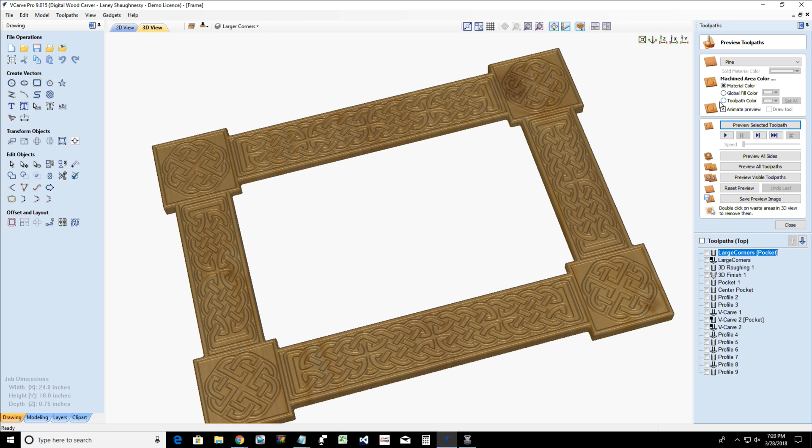If I put the color back on here, you can see if we had some color in the design. Let me get my corner color set back to black. There we go. So we'd see this nice looking frame with that Celtic design, kind of that raised effect and stuff.

Now, before we get into the joinery, let's go over to our 2D view here and let's talk about the vectors. I'm going to provide these 3 Celtic vectors to you guys and girls. What basically it does, these 3 individual vectors will allow you to build a Celtic design of any size.

We've got a middle strand, this part over here on the left. You guys let me know if I need to change my mouse so you can see it better, because I can go in and change it again if needed. But here, this little blinking area - this is kind of the middle strand that can be added to create any length that you want.

And then we have a corner piece, and then we have an end cap - if it's just kind of a straight strand, we have that end knot. I'm going to show you how I found them, basically Google searching and tracing the images. And then I want to show you how we blend these images together to create any length that we want.

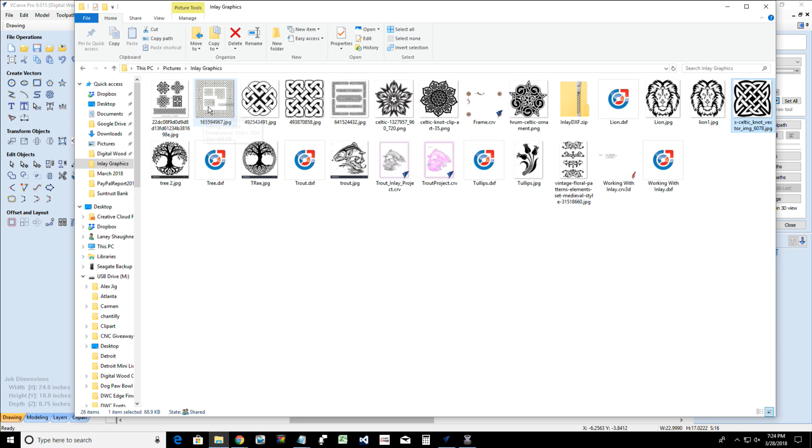There was some different unique kind of tribal look I was looking at, just different Celtic knots - I don't know where the lion comes into play there, but I looked at different Celtic designs and things. And ultimately, I ended up working with a design that allowed me to create 3 different parts.

And these parts are expandable. What I mean by expandable is let's take this group here, and I'm going to group it together by clicking on group after it's selected, and I'm going to grab this end cap here, and I'm going to group that together.

And if I come over and drag this over and line up my two parts, I could end up making a copy of this one. If I hold my control and alternate key down, I can pull another copy off of here and drag these knots out, and just start chain linking them together. I could make any length I want, and then use the end cap on both ends, whatever the case may be. As you can see here on the left, that's exactly what I did.

Now, when we bring these tracing vectors together, since they're closed off, we want to make sure there's a bit of an overlap on the two parts. Once we have that overlap, we're going to ungroup both parts, select only the outside boundaries of the two parts, and weld them together. That will remove the overlaps.

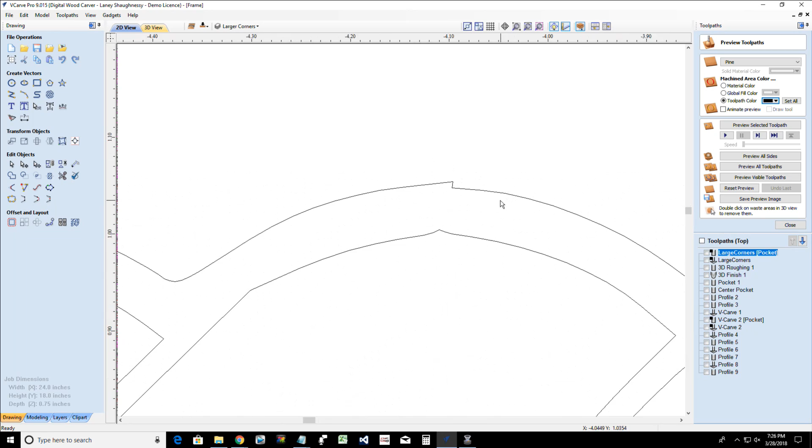Now there's two pieces here, three pieces. This piece gets deleted, this piece gets deleted, and this piece gets deleted. Now where the joining happened, we have a couple of step downs that we have to adjust.

That's a very simple node edit. We're going to come in and delete this point to pull that into shape. I can delete this point as well, and turn this into an arc just to get a little bit of curvature out of it, to kind of straighten out that curve. Let me zoom in tight for that.

Same thing down here, we can delete this point and pull that curve back into shape. We'd do that all the way down to get our curves cleaned up. On these two nodes, we delete them by hitting the delete key or right clicking and hitting delete, turn this to an arc, and pull that arc up ever so slightly to finish off that curve.

So we'd come down to the other side, same thing. Excuse me one second, I want to make sure that you guys aren't trying to... okay.

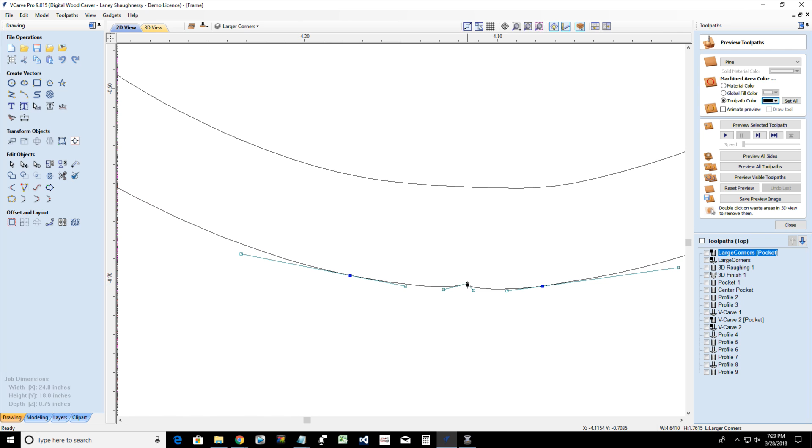For the last one, we've got two points there, so let me get on it. We would delete this point, and we would actually delete this point as well. Zoom in if it doesn't let you get on those nodes because of the anchor, so you can get rid of that point, and just kind of smooth out that line.

Sorry, we have some people walking in front of the property, so the dogs are barking. Once we do that, now we can group that together, and we could continue daisy chaining this together in a sense, and finish off with the end cap.

Now, before you do this, make sure you make copies instead of using your originals. Keep your originals intact, because right now if I wanted to put the end cap on the end of this, well, I don't have my original anymore. I just blended it together with this one, so I don't have an end cap. Now I'm forced to Control Z to undo everything I just did and get back to this point before the welding.

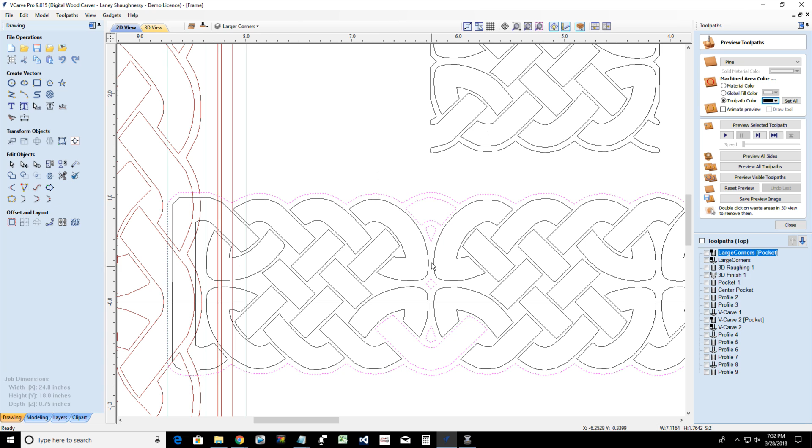And once again, I could ungroup that and select these two inner parts here holding my shift key, and I could weld, and then go through and delete those three inner parts.

You get the routine, you know what I'm talking about. So you're gonna get these vectors, so it'll allow you to create. You got some, you can make some frames with it.

Basically, you've got a corner piece, you've got just a straight run, and then you have an end cap. So those three vectors.

Yes, you could, Dwayne. You could put the originals on their own layer and make copies off of that layer. Absolutely, that would be the ideal way to do that.

And so let me take this and group it together. But so you get the idea.

All I did with these is once I had them grouped together, I went ahead and scaled them to whatever size I wanted on the width, and then I just stretched them to the length I wanted. If I needed to do any stretching or adjusting, I tried not to stretch too much. I don't want to stretch the knots out and deform it, but I had to do some stretching to get it to fit into my frame areas.

Okay, so we're gonna undo. I'm just undoing everything here to get back to my three original parts. Almost there.

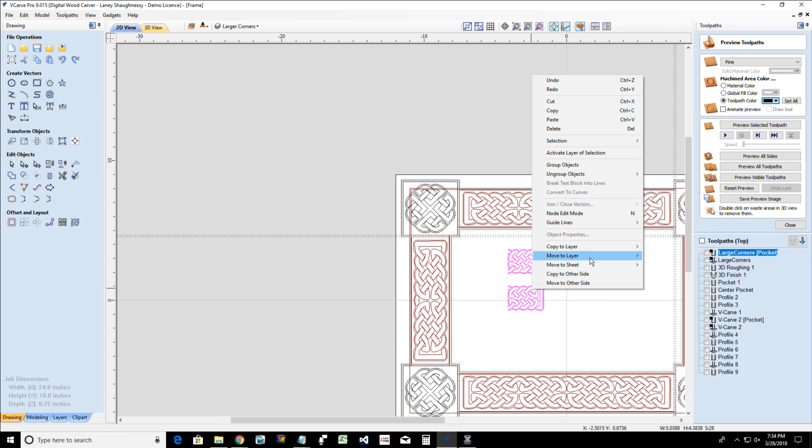There we go. And these three parts are going to be a DXF file that I'm going to provide. I'm actually going to provide this whole frame design for you in the Facebook group, the whole Vectric V-Carve frame design. But I'm also going to provide the DXFs because I created this design in V-Carve Pro, and for you guys and girls that have Desktop, I want you to be able to open it. You should be able to open it. It's a CRV file, but I'm not sure exactly the routine there.

So I'm going to just call this my Celtic DXF master layer. And I'm going to make it invisible because I don't need it visible right now.

All right, now let's talk about this Celtic design. Let me turn off the guidelines to get them off the screen, and let's take away some of the layers that I've created. So my large corner layers, let's take them away for a minute. Let's take away the center profile. The 3D - okay, that's my whole design.

Now if you recall, this was the original shape of the original frame, and we had models. Let me come in and see if I can turn on that layer 1, those models. And when we looked at the 3D view - let me close this - we had those models, and that's what we used in Monday's class to create that design. Well, I liked it, it was okay, but I really wasn't married to it. You know what I mean? It was a little, really nice looking, but it was skimpy, right? There wasn't a whole lot to it.

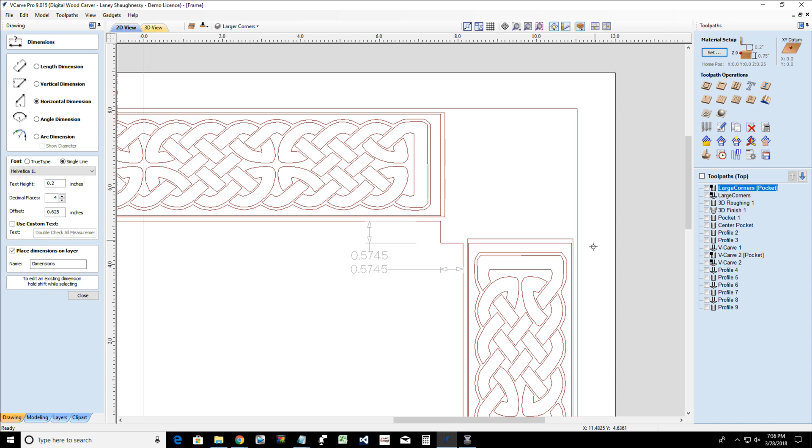And so what I did was I drew another rectangle, and I offset it outward on these two edges that same distance. And what that did for me - I'm going to take real quick and close my tool here. And you can see my measurements that I have over here on the left, where I was measuring to get those numbers.

But let me take this vector here, and let me move these to a layer. I'm going to call this layer my original.

And you see all these layers that I've got. You're going to get a version of this file with everything cleaned up, named, and organized. Even the tool paths are going to be named and organized for you. I'm going to do all the work. But I'm going to just call this my original frame layout.

I'm going to make that invisible for a moment to hide those two vectors, and let's delete that one.

Now, what I ended up doing was redrawing those rectangles. On the large corners, I made those offsets coming out from this edge, 0.5745, and coming from this edge out 0.5745, and made the four corner blocks much bigger. One of the Celtic knot designs, which you're going to get this vector as well, is what I ended up using in these larger corners, scaling them up and everything.

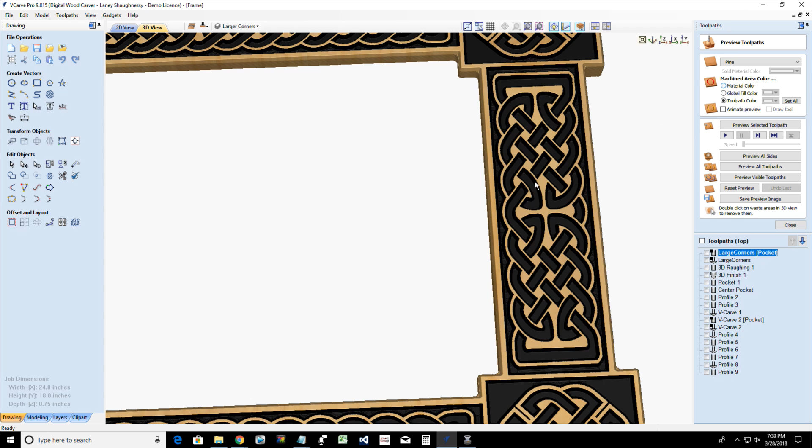On the inside and outside edges, I had that 60-degree bevel cut. Because I had that inside cut and everything, I wanted the outside of the frame and on the inside, where the opening gets cut out, to be beveled as well.

What I ended up doing is that offset distance — my depth of cut, by the way, was 1/8 of an inch. So knowing that, I drew a V-bit with a simple line tool. I drew a 60-degree V-bit.

I drew a line from the tip of the bit straight out, no particular length, and I moved that line relative to its position on the y-axis. I moved it up 1/8 of an inch. By doing that, it's simulating that cut depth.

So now I was able to take that measurement, that horizontal measurement for this offset, from this point to this intersection. I was able to get that offset, that 0.0722, and it allowed me to create the vectors.

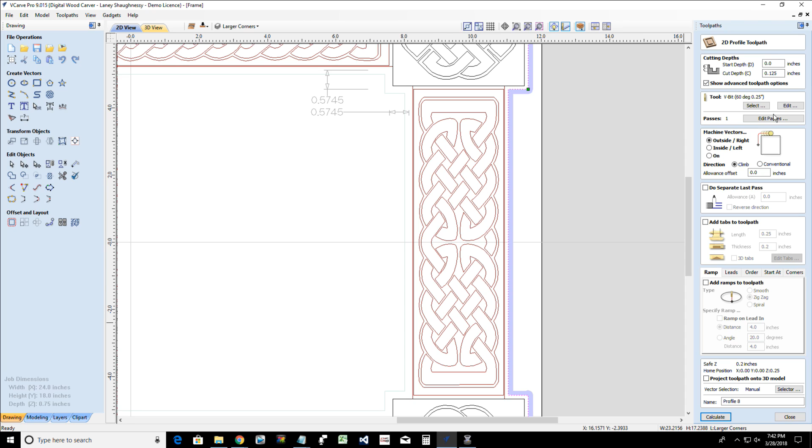Then I was able to run a profile toolpath with my V-bit. Oops, not that one. Nope, not that one, I've got to rename these. I was able to run that profile toolpath with the V-bit, and if we look at that profile toolpath, it was just a simple 1/8 inch cut on the outside of the line with my 60-degree V-bit, and that created that chamfer for me.

And then I did the same thing on the inside, running a profile cut with an inside toolpath with my V-bit to create that inside chamfer.

Now, when I actually cut the part out, I needed to know what that offset distance was, that 0.0722, because when I created the final profile toolpath, you'll see that the final profile cut is offset away from the line by that 0.0722.

If I open up that profile toolpath, you'll see that allowance offset away from the line. What that did, when it cut that profile all the way out — let's turn on the preview — is the edge of the end mill literally cut down the center of that V cut.

By offsetting that profile cut outward, it cut down the center of the V cut, creating that nice chamfer on the edge. Now you're going to see tool marks here on the inside and outside — those are corners I'm going to have to clean up. The software doesn't do a really good job of rendering inside and outside corners, so you're going to see those little anomalies right there.

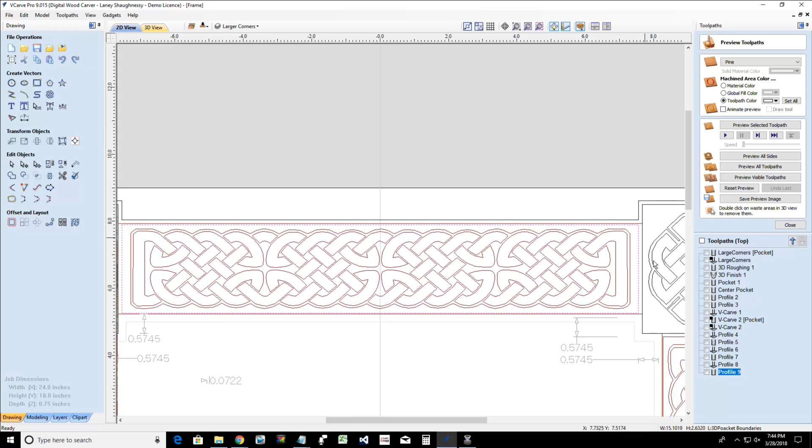So in order to get that nice width on that upper lip of the cut, before the chamfer and all, I had to go in and create an inner boundary with that offset distance, 0.0722, when I created my V-carve toolpath. This V-carved toolpath has got a 0 start depth, a flat depth of 1/8 of an inch, a 60-degree V-bit and an 1/8 inch end mill. Now notice that's the wrong one.

Let's actually open up the correct one, the large corners. Let's open up the correct toolpath. Let me uncheck this one here. And if we open this up, once again, it's the same 1/8 inch end cut and everything used to create those V-carve cuts.

Now, the pocket cut did all the inside, so now you can see the actual toolpath area that got cut.

Now, when I originally created this with the Celtic design, this outside rim right here on the knots was very thin. So I ended up offsetting a new line outward, this pink line right here—let me hit the control key to show you where my mouse is—I offset outward about a 1/16 of an inch just to get a nice bit. I wanted the wider profile to be about the same as the white area here on this Celtic knot.

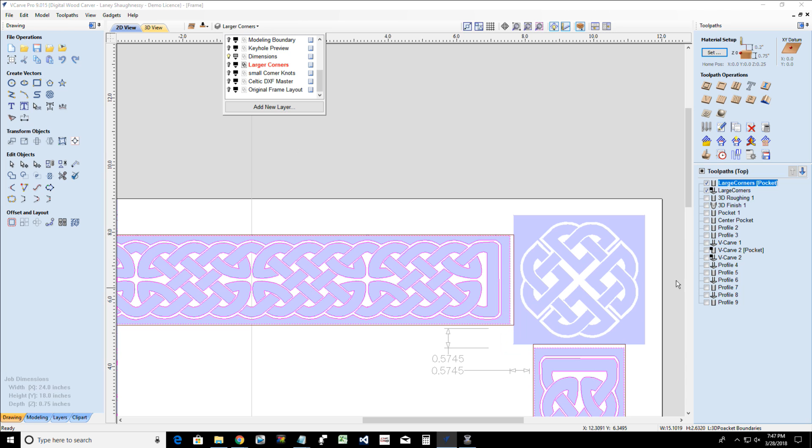So if we were to recreate this from scratch, we would basically have drawn out our frame. Let's see if I've got my layers organized correctly—let's turn off the toolpath here. We have our 4 rectangles that we've created, and the Celtic knot is centered within those 4 rectangles.

We've drawn out the 4 corner blocks, which are the large corner blocks here. And inside these 4 parts, you can see that I'm offset off of my line. I created another rectangle here, offset off, and that's what my pocket cut and my V-carve use—those are the 2 vectors we're using to create that toolpath.

That gave me that nice wide frame all the way around on all 4 sides, and it gave a consistent look. If we look at the preview one last time and zoom in, let's turn those toolpaths off so we can see what's going on here.

Let's get up close and personal with this. You can see that constant thickness all the way, even past the edges, around the corner and everything. So we just created those offsets so that when we machined these straight areas with that raised Celtic knot, the V cut width would be consistent with the corners, that chamfer on the corner, so it's a continuous line.

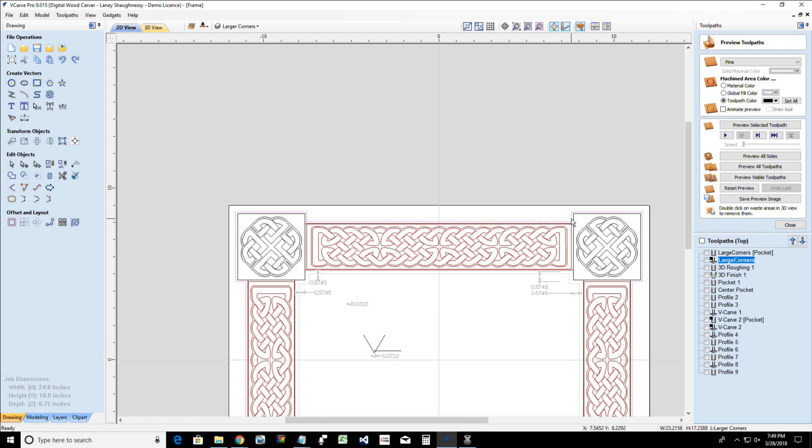And so it was just a matter of taking measurements, offset measurements and everything, and determining what I needed to do to recreate those knots. Once I did that, I created a new profile path for my V-cut, for that chamfer, and also for the final profile cutout.

All right. Now, taking this design as is, here's where we're going to start from kind of scratch, and we're going to see how we would create the joinery if I was going to cut just this part out of a long board, then cut out the two side parts, and cut out this other part—cut these all out four separately. I want to be able to join them, kind of like a half lap on the back side of the corner block.

This allows me to have a long, narrow board on my table, and cut out, you know, more than one long narrow board, or even short boards—it doesn't have to be long. I can cut out these frame parts, 1, 2, 3, and 4, instead of cutting it out of a full panel with all this waste in the middle. How would I cut this out? How would I draw the joinery? And that, ladies and gentlemen, is what we're going to be doing now.

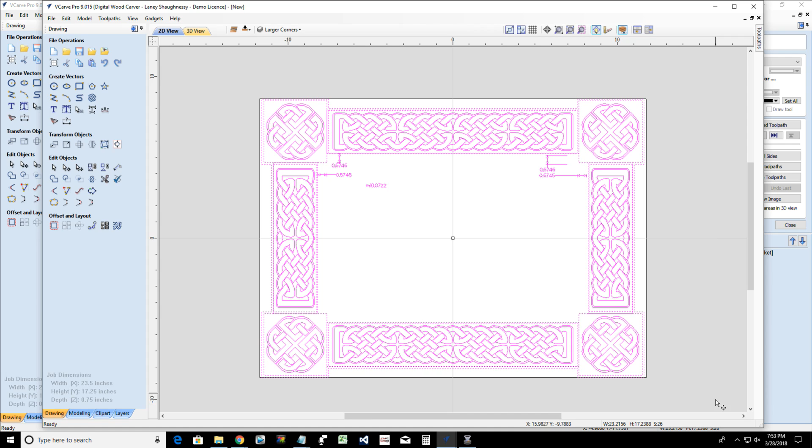But your question was, can you import data from one file to another without having 2 sessions of VCarve running? The way to do that is you export out of your original design and save that as a DXF file. I have a folder with all kinds of DXF files for things like picture frame profiles, router bit profiles, different designs, and I can pull those DXFs into any new project. So David, that's kind of how you would handle that.

Wayne Henniker asks, how did you get the measurements to show on the project? Well Wayne, we have a tool in Vectric called the dimension tool. It's under Create Vectors, where you add dimensions to a 2D drawing. In that dimension tool, we can take a length measurement, a vertical measurement, horizontal, an angle.

We can even get an arc measurement, and we can write in custom text if we wanted to, but we would select what type of measurement we're trying to take. In this case, it'd be a horizontal, and then I could come from this point to this point and pull in that measurement. I can change the size of my text height or how many decimal places I'm showing, and I could show the offset distance of how far it offsets from its endpoints and things.

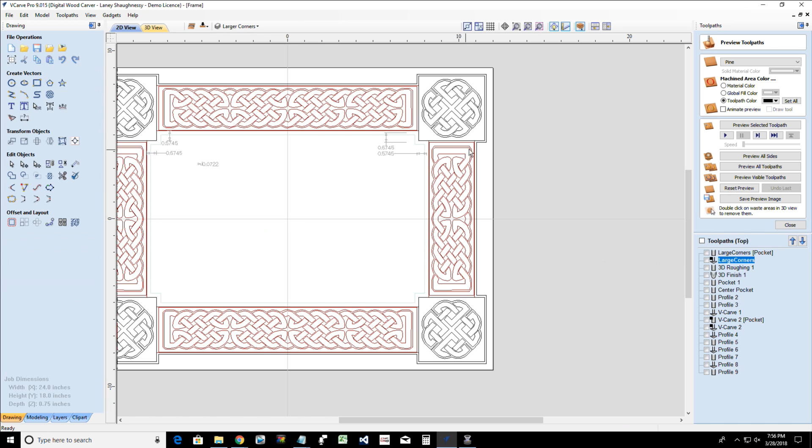So the V-bit is basically on my outer profile. I'm doing a profile toolpath, cutting down 1/8 of an inch deep. I wanted that bevel to be the same as what my pockets were with this Celtic knot, which was 1/8 of an inch. So I cut 1/8 of an inch deep on the outside of the line with my 60-degree V-bit.

What that did for me was to create that chamfer on the outside of the cut. Now that 1/8 inch bevel goes from the top of that cut down to the middle of that V, because this would be a V cut. I'm going to reset this back to a blank board so I can demonstrate this.

So that V cut, that chamfer cut, if we were to preview it, you're going to have that V-shaped cut. Let's turn this around so we can see both sides of that V. Now, that distance from one side of the V to the center, that offset distance, 0.0722, is my offset distance for my V.

That 0.0722 — when we created the final profile toolpath with our 1/4 inch end mill, we offset that, cutting all the way through our material with our 1/4 inch end mill on the outside of the line, but we offset that cut 0.0722, that offset distance, to the middle of that V. By doing that, that allowed us to do that profile cut and cut that edge right off at the center of that V to create that chamfer.

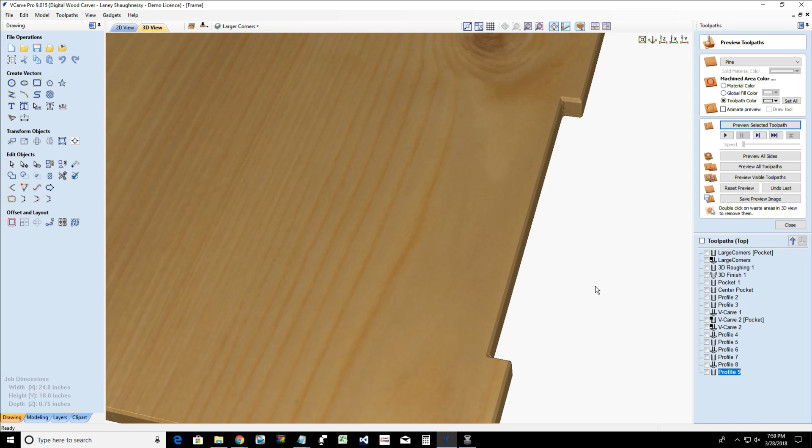Yes, David, you're welcome, first of all. You could save your 3 parts and import them into other files. Those 3 parts — let me go down to my frame pieces right here — these 3 parts, you can save as a DXF file, and that's what you guys are going to get. You're actually going to get a DXF file with these 3 parts in them.

And you can bring them into any job that you want to — oh, I want to make a Celtic frame, or I want to make a Celtic knot running along a long length, or whatever the case may be.

But you can also put a corner on it rather than using separate corners. I used a different Celtic design, but you're going to get this corner Celtic design as a DXF file. You're going to get the 3 parts as a DXF file, and that way you can use them in other projects. Okay.

And yes, we would save them as a DXF, and that's exactly the type of file you're going to get from me — a DXF file that you can bring into other parts.

All right, so let's turn off some layers here. Let's turn off our DXF layer, and let's turn off our dimensions. Let's get into full view, and let's get over into our drawing side, because we're going to be focusing on the drawing.

And here's where it kind of gets challenging. We're going to create some joinery on the back side of this to create some half lap joints. Basically, these parts, the 2 rails here, are going to snap into the back of these 2.

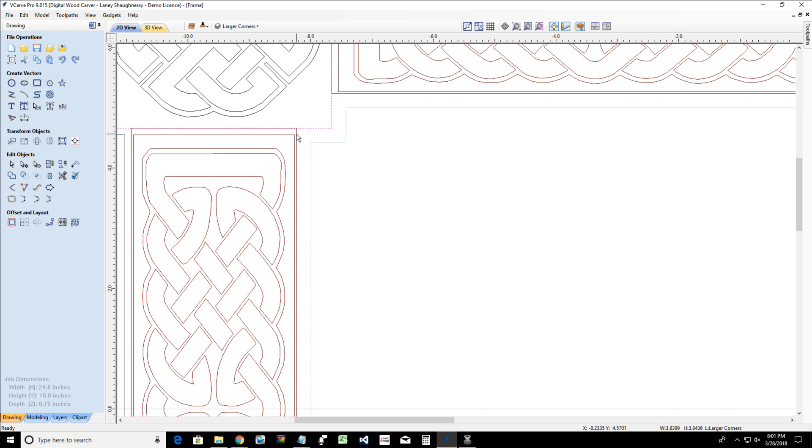So in order to do this, we're going to take some of our original vectors — our corner here, our outside boundary. Oops, not that one. Our outside boundary on all 4 sides, our corners and our outside boundaries.

And we are going to right click, and we're going to copy them to the other side, because we're going to be doing this on the back side. Remember, this is a 2-sided project. We're going to do all of our joinery on the back side, so we're going to copy them to the other side.

And now if I flip and toggle to the bottom side of my board, you'll see that those — oops, I forgot one of the rectangles. Let me switch back over and let me get that bad boy over there as well.

Copy to other side. There we go. Oh, I gotta remember I'm flipping my board, so bear with me, I copied the wrong vector. I'm a goofball. Copy to other side. There we go. That should do it. Remember, when you're flipping along the x-axis, everything that was on the left is on the right, so on and so forth. So I was copying the wrong vector.

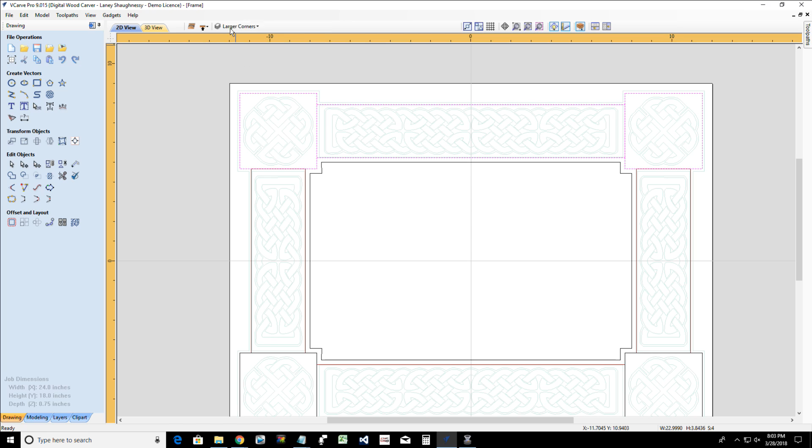Now, on the back side, let's decide right now that this top part here, let me see if I can turn off the other vector layers in the background. That way it... let's see if I can get my... oops. Let me flip this over. Let me put those 4 Celtic knots, corner knots, on a different layer so I can turn them off. So let's take those.

This is where layers really come in so handy. I don't care how many layers you have, but you can just separate things to make it less complicated. So these are going to be my corner knots, I'll call it. Right now I don't want it visible, so I'll just turn off the visibility. Alright, now I'm going to flip back to the other side.

Let's see here. Stand by, I gotta remember what layer I was on. What layer was I on? Hold on a second, guys.

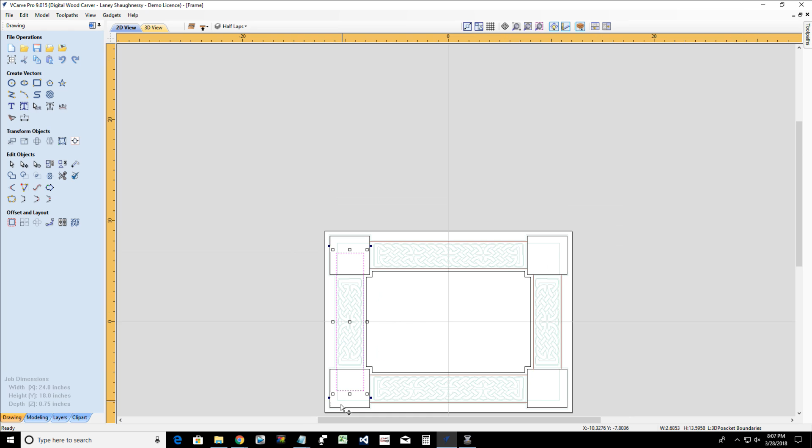You better snap there, boy. I don't think it'll snap. But that's alright. If I grab this, I should be able to snap that to the center. And I should be able to come in and snap that. So I actually did snap to the center, I just didn't realize it. Alright, so that's going to be our one piece.

Now this is going to be important because on the back side of the rails, the top piece and the bottom piece, is where this pocket is going to be machined out so that the stile fits into it. I have to do the half lap on the front part of the stile. So right now we're working just on these back corner blocks because we're doing our pocket on the back corner. And the front side of these 2 rails is going to be pocketed out. You'll see what I mean in just a moment.

So let's go ahead, since I've already got this one drawn, I'm going to cheat. I'm going to delete this one, and I'm just going to mirror this, creating a mirror copy, flipping about job center, and flipping it horizontally. Just going to mirror it horizontally. Okay, that way I have my 2 parts. Now we're on the back side of the board, so we're focusing on the 4 corner pieces.

Now there's 2 ways that I can approach this on the 4 corner pieces. One, I can just draw a rectangle here and create a pocket cut. I would do some little dog bone fillets, you know, because square peg, round hole kind of thing. I could look at if I took these corner parts, I could kind of... No, I think I'm going to do the rectangle. That's going to be the smartest way to approach this.

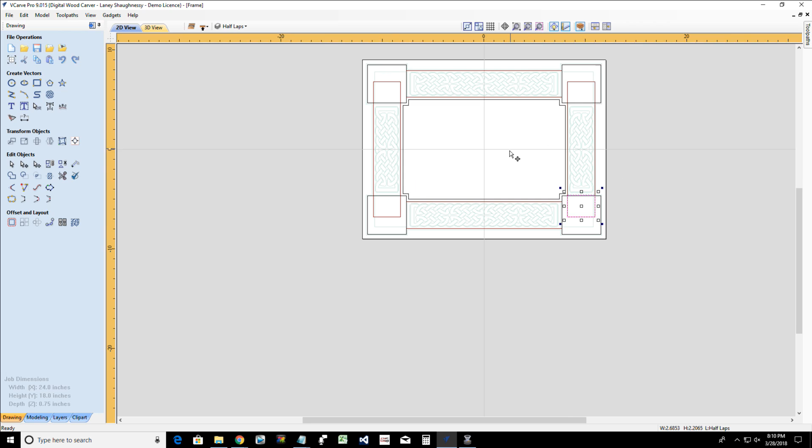And so with that, since I've got this one drawn how I want, I'm going to mirror it. Why draw what you can copy? I'm going to mirror it horizontally, vertically, and horizontally again to create the other three parts.

And so these three vectors that I've just created - all four of them, sorry - I am going to move them to a layer that... well, actually it's on the half lap. Never mind, I've got it already. See, I thought ahead, I got it on its half lap layer already. Wonderful, wonderful, wonderful. Great, so we can see those half lap layers. All right, so those four parts are on their own layer. Awesome.

Now let's break this up into 4 pieces. All right, let's break this up into 4 pieces. So I'm going to take... I paused myself for a minute. I'm going to take this vector and this vector. These are going to be 2 parts. These are going to be the stiles.

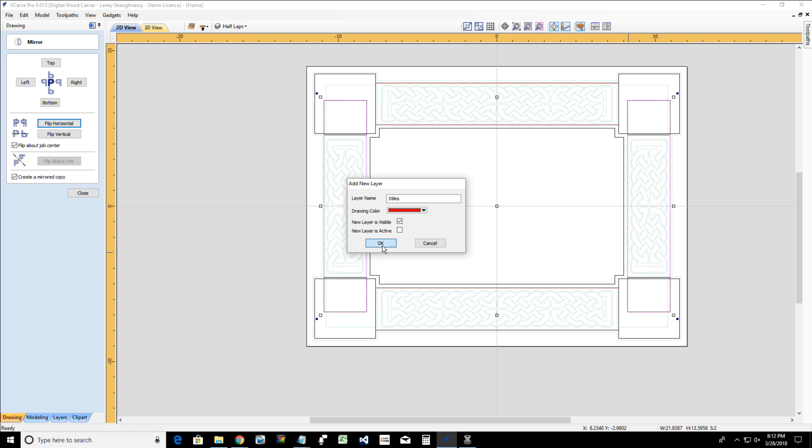And I'm going to move them to a layer called stiles. Your layers are going to be all cleaned up. You see 100 layers going on there going, oh my God, Laney, how do you keep track of all those? And I'm going to make them red. Okay, all right. So those are those 2 parts.

Now, on these 2 parts here, or this part and this part, and this one as well, those are going to get moved to a new layer, and we're going to call this rails. Now remember, we're working on the back side right now. We're going to have to do the same thing on the front side to make these parts one piece.

So now if I turn off all of my vectors and my half laps, get those off, my stiles, if we turn those off, I got one more vector up here, one more layer turned on. Right there. Let's get everything turned off. So my 2 rails are going to be this part here and this piece.

I can now take those vectors and bring them into another job, and I could cut them out individually. I could have this board - let's do that so it kind of doesn't... you guys kind of get what we're going here. We're going to open up another instance, and let's say that this board, again being a double-sided job, but let's say that it is 24 inches in length by, let's say it's a 1x4, so that would be 3.5 if I'm not mistaken - 3.5 inches wide, 3/4 of an inch thick.

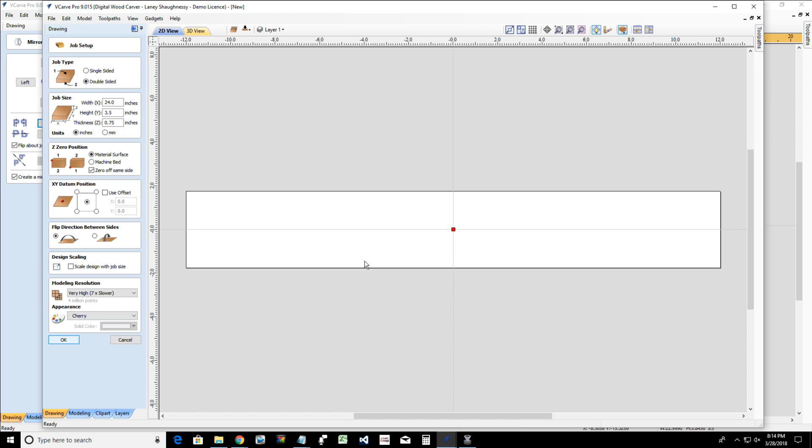We click OK. And was that a double-sided job, Laney? Did you set it up as a double-sided job? No. Yep, we're going to machine off the same side, flipping about job center. Okay, so I'm going to take these vectors and I'm going to copy them.

And I'm going to paste them on here, and center that on my workboard. Now, 1x4 is a little bit too thin. I went bulky with this frame, so let's make that 5.5.

Let's do that one more time because I hit cancel instead of OK. Always click OK to lock things in.

Okay, now I gotta make sure that I'm gonna be clamping these, because this is gonna get cut out, so I can run top clamps here, and I can have my alignment pins in a certain place. They don't have to be on the end. So I could actually put my alignment pin holes somewhere in my waste area.

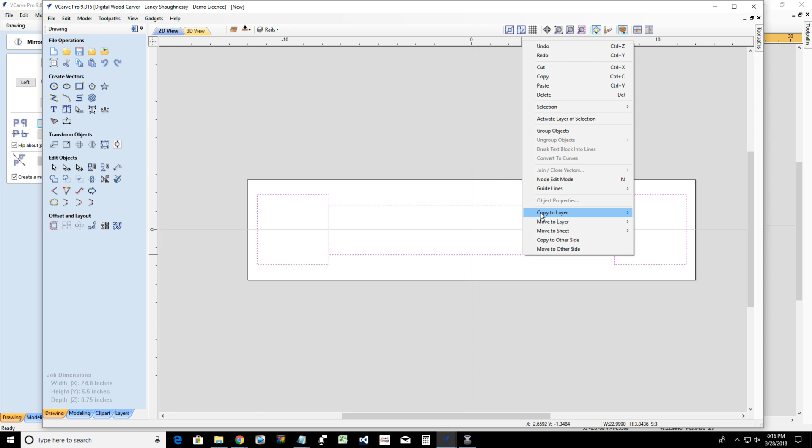But let's get the front part of this. Actually, these should be on the back side. This should be on the back side. Actually, the back and the front. So I'm just going to copy this to the other side. Okay, so we have it on the back and the front.

But on the front of this rail, let's turn on the 3D pocket boundaries and my large corner, and my Celtic knots. Oops, that's the small Celtic knots. I need the big Celtic knots, corner knots.

Okay, so I want all of these vectors right here. I'm going to copy them. And I'm on the front side now. I can go ahead and delete this out because I'm just going to paste that new vector there. And let's center that up on the board.

Perfect. All right, so my front, my back. All I have to do, all I need is this one, right? I don't necessarily need the two, but remember my half laps are going to be on different sides. But since the rails are going in, it doesn't matter which side is flipped one way. So all I really need to do is draw this one part here.

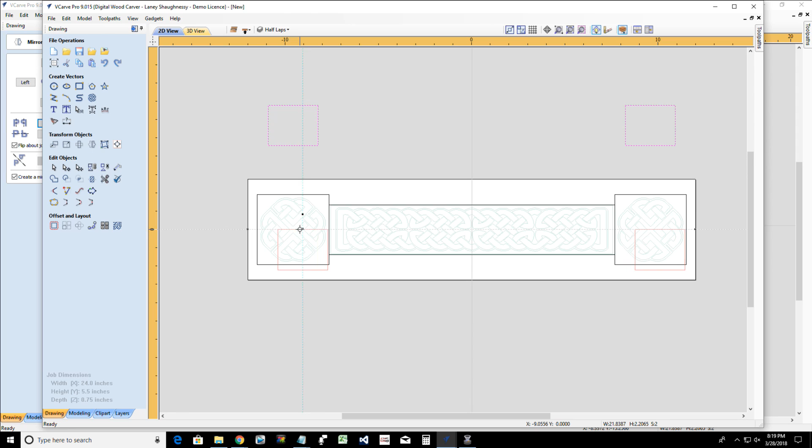They're not centered, right? They're on that bottom edge. They're on the center of the blocks. So if I grab this bad boy right here, my center of this rectangle, you see I'm snapping, you see that snap line. If I grab that, I can snap to the center of my rectangle there and get those parts in the right spot. Nifty, I love the snapping tools.

All right, so let's create some toolpaths off this part. Let's create some layers in this board first. Half laps is there, that's good, that's what we're gonna call them. They're basically, in a sense, mortises or what have you, but half lap is fine.

All right, so we've got our corner knots. We've got our large corners, 3D pocket boundaries. I'm gonna change the name of that, and then the rails in general. Layer 1, don't need. All right, now what do we want to call this layer here?

Besides 3D pocket boundaries, because it's not 3D, we're going to call it V-carve pocket boundaries. So we're going to rename that, and learn how to spell pocket. There we go, pocket boundaries.

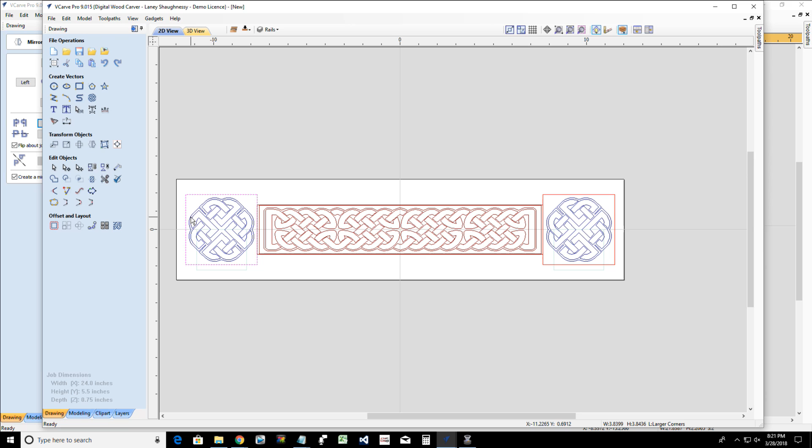Okay, let's go ahead and create some toolpaths so you can see what's going on here. So the first thing is, first and foremost, we're going to take our corner knots, right? All of this, we're going to select this inside boundary right here and this knot, and this corner and this knot. This part is going to be a V-carve toolpath, flat depth, a 0 start depth, a flat depth of 1/8 of an inch. I'm using a 60-degree V-bit for the V-carving and 1/8 inch end mill for the flat work in some of these larger areas.

And this is going to be our Celtic, let's call it, let's do it right. This is our rail Celtic V-carve. And it's going to be a 60 degree - well, let's leave the bit off because there's going to be two toolpaths that get created. So we will calculate this toolpath. Okay, we can preview.

All right, we can preview those knots and things. Doesn't look like much right now, right? Because we haven't done any of our nice little decorative inside cut part or any of that stuff. So we've still got more vectors to draw, but I wanted to get that V-carve cut.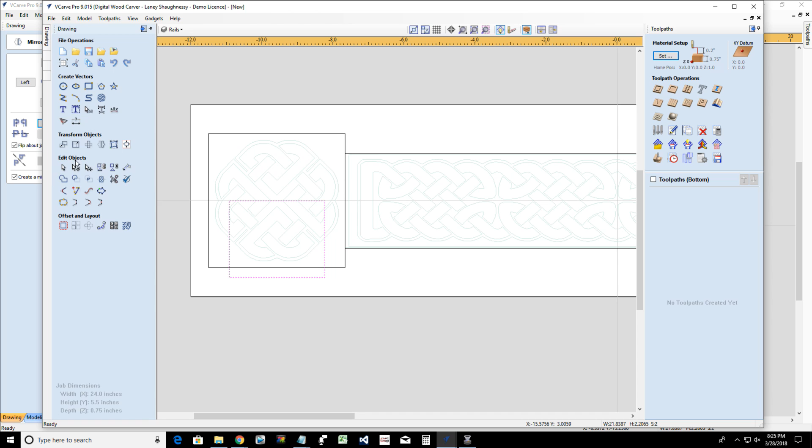But before I create that tool path, I need to create some fillets. You know, you can't fit a square peg into a round hole. So on these two corners up here at the top, I got to create some fillets for my router bit to escape from. In the drawing tools, under edit objects, we have our fillet tool. We have a dog bone fillet, we have a T-bone fillet. In this case, we're using a dog bone fillet because dog bone fillets are used for creating clearance in internal corners to allow slotted pieces to fit together, okay?

So I'm using a 1/4 inch end mill to pocket this out, so I want a radius of 1/8 of an inch, and I want to come over and put my dog bone fillets in here. Same thing on the other side.

Now we don't need this on the bottom side because this is going to be flat. When this gets milled, this is all going to be open - this is what my part's going to kind of snap into. So we only need them on those two end corners, because you can't fit a square peg into a round hole. And if we didn't do this, the radius of the router bit would cause a rounded corner there, and my sharp corners of my stiles wouldn't fit in there.

So now that we have those, we can go ahead and create that pocket cut. I'm going to cut to a depth of 3/8 of an inch, 0.375. And we're going to call this our half lap rail, half lap cut. And this one I know, there's no ifs, ands, or buts about it - it's a 1/4 inch end mill, so it's gonna be a 0.25 end mill. All right, so we're gonna calculate that tool path.

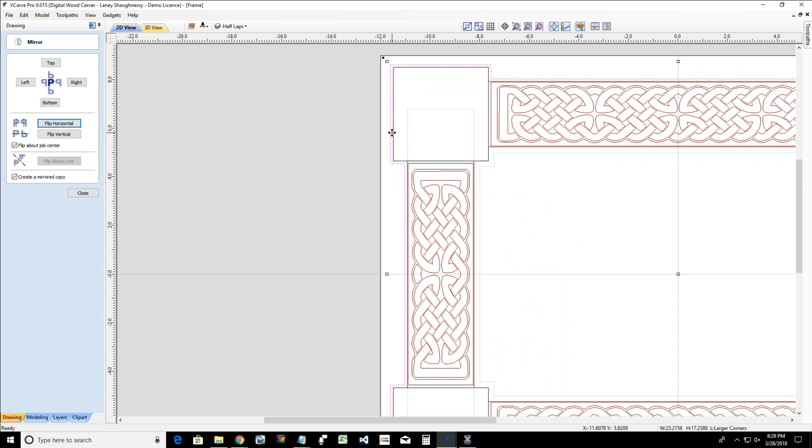Now what I'm going to do is cheat a little bit. Let's flip back over to the front side here. I have this vector here that is pretty much measured out and stuff. So I'm going to take and steal that. Well, actually I'm not going to take and steal that - all I'm going to do is, so we can draw it out, I want you guys to see this drawing out. So let's just at least take a measurement. I believe it's 0.0722 on that horizontal measurement.

Oh, I'm sorry, it's 1083. That's my V-cut, 1083, so that's my offset distance. 1083, that's my magic number. So let's go back over here and create that cut.

We're going to take this rectangle here, this very far outside one, and this rectangle here, and offset it outward 0.1083. We're going to create sharp corners and create offset. Now, on this part, we're going to need this part for the cut.

Right here where my rail goes, I do not need a chamfer there, in this little section right here. Let's draw that section out so you can see it.

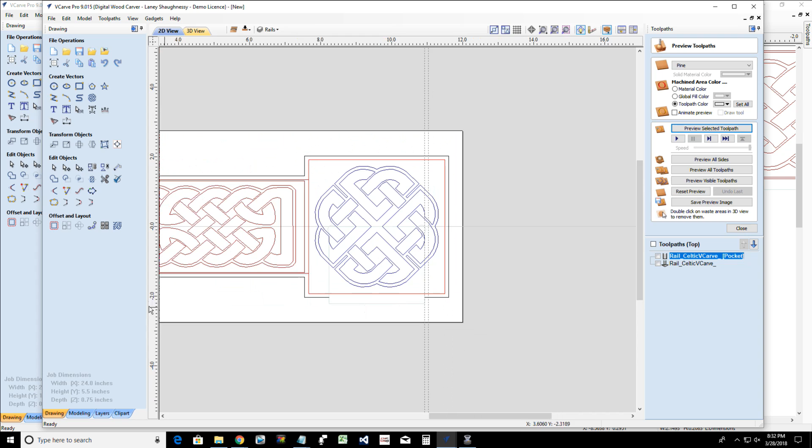Same thing on this side over here. I'm going to come in and grab a guideline. I'm snapping to this point here. I'm going to drag another one over on this side and snap to it as well.

Oops, I didn't snap. Snap to it, boo. Okay, and now I can right click, create a relative guideline again going positive to the right, 0.1083. I can create that guide.

And then on this guide here, I'm moving to the left. I'm creating a new guide to the left, so it's a negative number, negative 0.1083.

And what that allows me to do is in node editing, on this line here, on this intersection, I can cut the vector. On this intersection, I can cut the vector. Oops, I was off.

I just did an undo, Control Z. There we go. And that will allow me to remove this line. Alright, I can now pull these guidelines back, I don't need them anymore. I'm just pulling them back into the ruler. And once again, I need to come over here and do the same thing. Node editing.

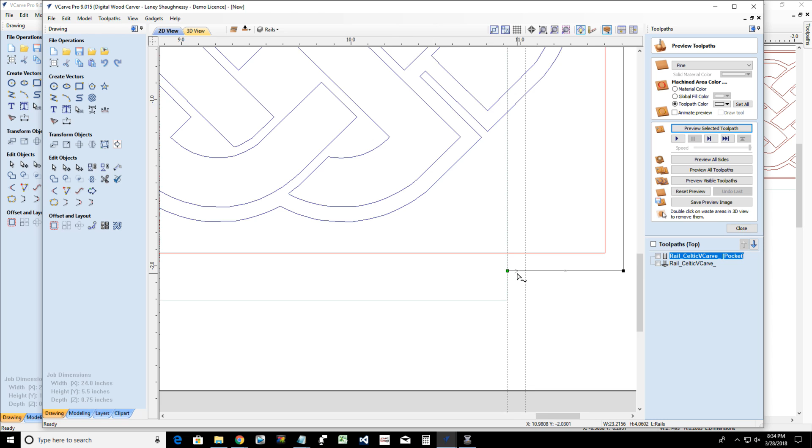No, I didn't snap to it. Control Z to undo. Get right on there. There we go. Now I can delete that line.

Now I'm going to take one of these rulers back, and the other ruler I'm just going to bring over and snap to, oops, snap to the wrong end, snap to my end there. And I'm going to make a relative move, negative 0.1083. Go into my node editing tool. And once again, mouse pointer right on where you want to cut, and cut. I can now delete that.

Okay, so on these two vectors, here and here - oops, not that one, not that one either. Alright, let's do that again. Here and here, these two vectors are going to be a profile toolpath, cutting 1/8 of an inch deep with a 60-degree V-bit on the, let me see here, outside of the line. So I need to make this my start point to be on the outside of the line there. So let me do that real quick.

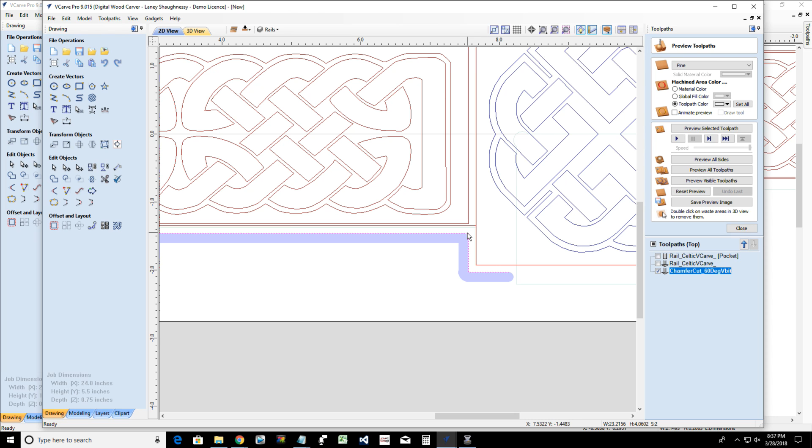Now, keep in mind that we're going to have these corners and all, we might have to do some chisel cleanup work when we do that final profile cut. But so we've got our chamfer. Let's preview that cut, let's preview that profile chamfer cut. That's creating this profile chamfer here.

Now let's go ahead and make this a little bit lighter. Let's go with kind of a maple so you guys and girls can see it a little better. Well, we've got that chamfer cut. Now let's create the profile cut, the profile cut to cut this part out.

So on this, while these are selected, I'm going to create a copy of this on a new layer, and I'm going to call this my profile boundary. Okay, and I do want it visible, and let's make it green.

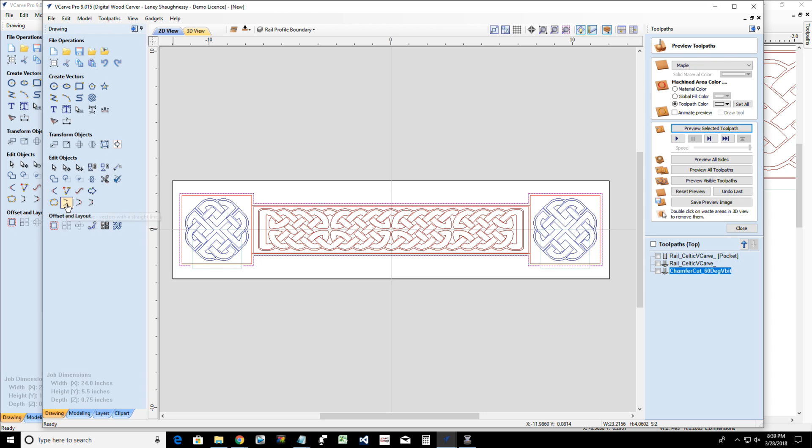So on that profile boundary, I don't need to turn anything off. I can just make sure that it's active, and I can take and join those back together. That copy that I made, join that back together with a straight line twice. Click that button twice to join that back together.

This is going to be my profile boundary for my profile cut. Now, here is where we're going to be cutting down the middle of that V. And that distance is 0.0722 for that 1/8 inch cut, 60-degree V-bit. We talked about how to draw out the V-bit and get the measurement and things.

So I'm going to do a profile cut all the way through the material with a 1/4 inch end mill. And I'm going to be on the outside of the line, but I'm going to have an allowance offset of 0.0722. Now, I'm not going to add tabs to this. You may want to add some tabs and things like that, but I'm not going to add tabs so I can move these parts, delete the waste so you guys can see the finished part.

This is going to be my rail outer profile. I think it's only 1 T for outer, might be 2. Profile, 0.25 end mill. I'm naming the toolpaths ahead of time because I'll send you these files too, so I might as well do it right from the beginning.

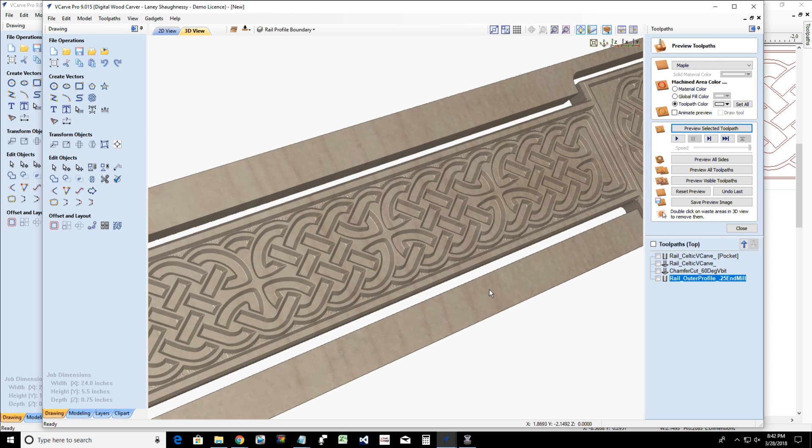And so this will be our rail. Okay, let's flip it over to the back side. You can see that pocket. All right, we got a nice pocket for our rail, yes. But we got the nice pocket cut for our stiles to glue into, glue and clamp and things. Let's flip it back over here.

All right, so we've got that nice cut. Now let's go ahead and draw out the rail. Now, in this case, we've got everything there, or our stile, I keep saying rail, but I've got everything named. Rails, larger corners, corner knots, half lap rail.

What I'd like to do, because I'm going to just draw this out of the same project, I'm going to name all of my next parts here. I'm going to rename all of these. I'm going to name this rail half lap, so I know it's a rail. Rail corner knots.

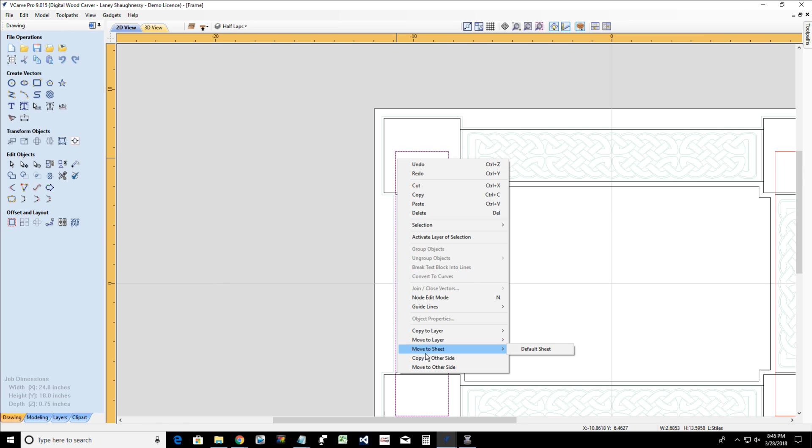But the most important part is the backside vector. Let's get it turned back on. This vector right here is important. I need that because that's the actual length my piece is going to be when I cut it. So we are going to copy this...

and paste. Okay, so now on this part, we are doing the stiles, but I am going to rotate this 90 degrees so it fits on my board. So I'm going to take it off its center, rotate it 90 degrees, and center it up on my board.

Now, if I was smart on this project board that I'd be cutting the stiles out of, I would make this board a little wider, or at least a little longer, so I could get both parts out of one piece. As it sits right now, I'm a little shy on the length, so I can't get it all out of one piece unless I change my board size.

Since I am working off center, I gotta remember I'm flipping this board over, right? We're flipping this board, so remind me on that on the rails. I gotta create the alignment pinholes. So I'm going to put this back in the center and call it cutting it out of there. And of course, if I wanted to, I could make this whole part longer and just have a longer frame, but this is the size frame I've created, so I want to stick with it.

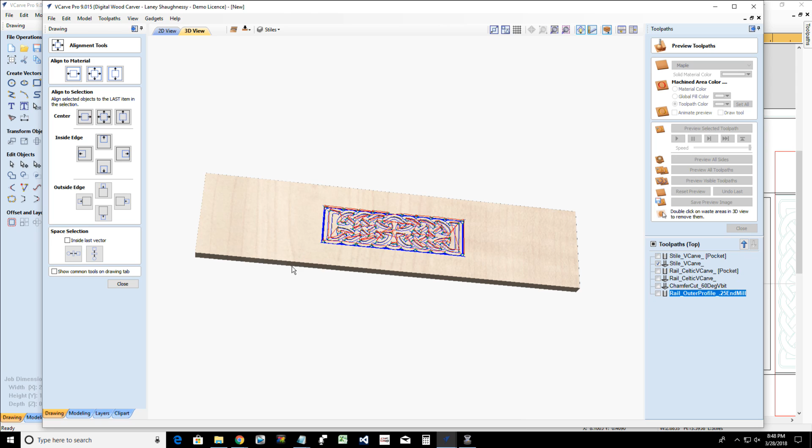Now, on the front side of this is where I have to do the half lap, because remember, this part's going to snap into the backside of the rail. So we got to create the vectors for that. On those vectors, our part is this area here from this line to here. Remember, we drew our rectangle based off this.

I'm going to draw another rectangle, but here's where I've got to be careful. When I'm doing this pocket cut, it's going to be much bigger, and I want my router bit to come and do a straight cut right here along this line. It's important that I don't draw my rectangle just to this size. So let's draw out this rectangle, and I am going to draw it to size just to get it on the board.

But now I'm going to size it up, wider on the ends, and if I hold my shift key down, I can pull both of those at the same time. It's going to be a little wider on the outside end here. So this is going to be my— oops, I held my shift key down. That was a wrong move, guys. Do not hold your shift key when you're pulling on the front. Okay, so this is going to be my vector.

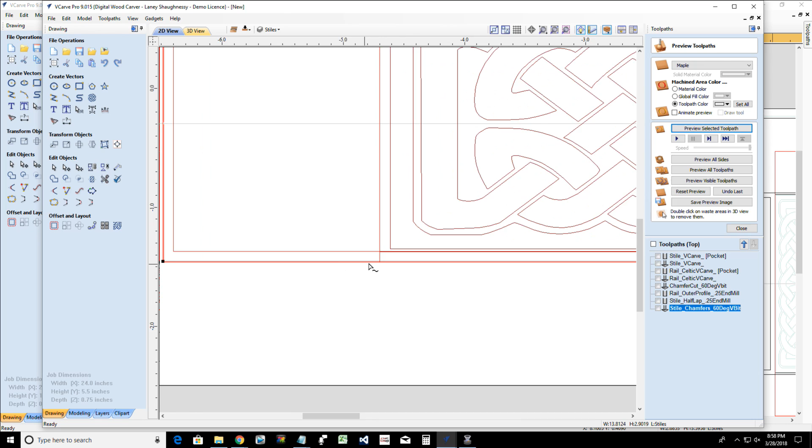I'm a little off on this one here, so I need to fix that, because this is my chamfer and I need to be right up on that line. So bear with me a second, guys and girls, I've got to snap this line.

Let me make sure of something here. Oh, okay, that's not even the right line. You stupid goofball, this is the line right here. Oh, that's way off then if that's the line. Hold on a second.

I'm going to center that up on my workpiece. Dang it, I need to get right on that line. I've got to pull it down to that red line right there. There we go. Okay, let's make sure this one's... oh, that one's not even in the right area. So let's pull that up to that red line. There we go. All right, we're golden again.

Okay, so I've got to, while I've got this rectangle selected, cut the vector. So let's go back into node editing, and right here, cut the vector. What that will allow me to do is that part that I've just separated, I can go ahead and, while it's selected, right click and delete it because I don't need that end.

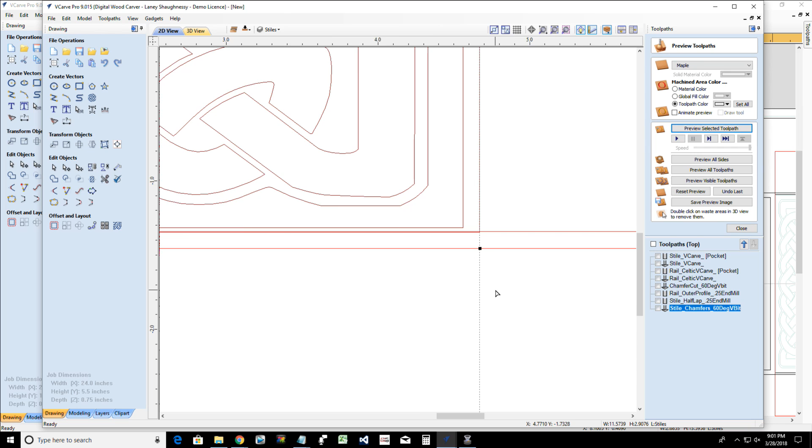So we've got this part here. Now, in line with this vector at this corner, I need to cut that node. So if I go into node editing, if I need help I can snap to this so I know where to cut. Up here I can use my ruler and my guide so I know where to cut. Oh, I was a little off on that one. There we go.

And this part here, this was my original boundary. Well, I just needed it for the layout and stuff. Do I want to make another vector? Well, why not? Let's copy this to a new layer and call this our stile profile cut boundary.

And I'm going to make this bad boy like a light aqua. Okay, that way I can turn off that stile layer. Oops, no I can't - let's move these over to the proper layer. Let's select that one and that one, and let's move it over to that profile cut boundary.

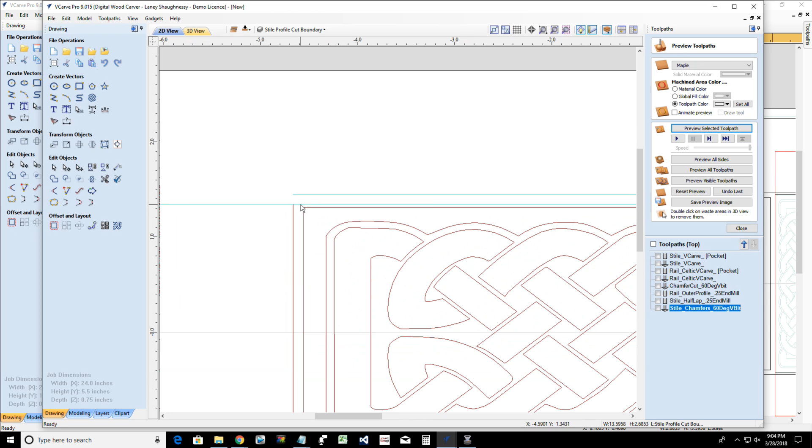What that'll allow me to do is... I've got to cut it at this end. Wait a minute now, what didn't I do? I didn't cut it at this end. Cut the vector.

Okay, now what that'll allow me to do is delete this and delete that. All right.

So if my V cut along these two lines, which it did, remember I need to be offset from those lines 0.0722, and we put the offset in the actual profile cut. Well, I can't offset because I have to cut right on the line on these end parts here.

So before I join these together, I need to offset these two outward by 0.0722, and I need to delete the originals and offset. Oh, dadgummit.

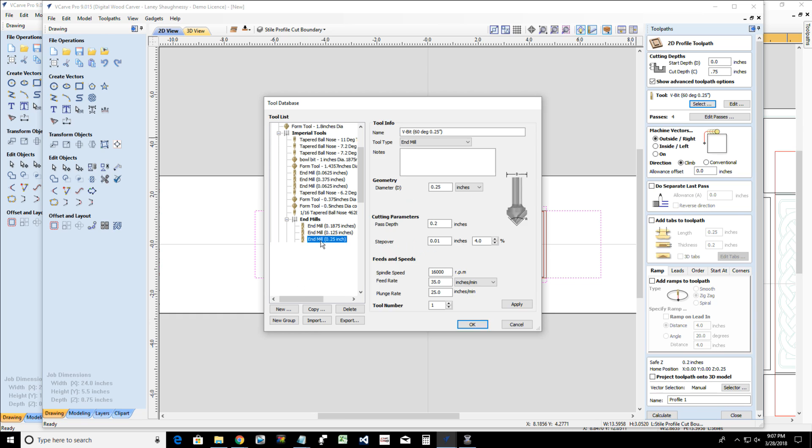So we're going to do a profile toolpath, 3/4 of an inch thick, 1/4 inch end mill, outside of the line, and again we would put tabs in, but I'm not going to put tabs in just to show this part. Final outer profile, and let's give it a name of stile so we know what it is. Style. I think it's only one T, but I got two in there. But it is a 0.25 end mill.

And let's calculate that toolpath, and let's cut that out.

Okay, so if we look at our part here, let me get it turned. We should have our nice chamfer on the outside of both sides cuts. On the inside where the V carve is, should be a nice chamfer, and then we've got a straight cut because the chamfer for the other side is on the corner blocks, the rails.

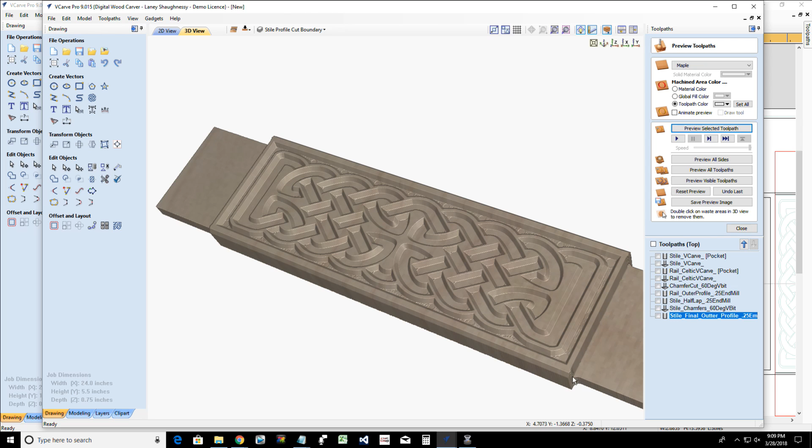Now something you got to keep in mind: our internal corners, we've got four of them - 1, 2, 3, and 4. We're going to have the radius of the router bit there, it's not going to be a straight cut. So you are going to have to do a little chisel work to clean up those inside corners so you can put those parts together. All right.

So we've got our - and this is the same part, you can just carve this twice for the two stiles. So once again, here's our stiles.

Okay, let's reset the preview and let's look at our rails, and let's preview those toolpaths. Okay, and let's - we got to do the back side. So let's transition over to the back side, and let's preview that toolpath.

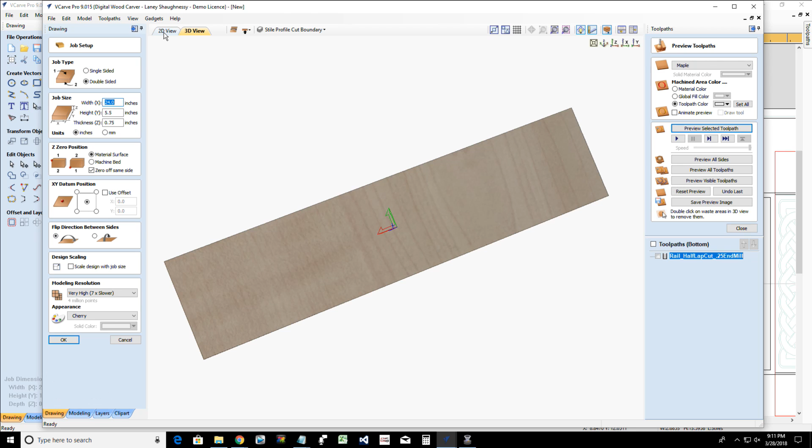And so this will be our styles, and we can have a nice frame. And of course we can size the rails or the styles any size we want. I've got this just under - you know, I've got it at 24, but the actual part itself, if we go back into, let's turn off the stiles for a moment.

Turn the rail boundary on. That rail boundary - that part is about 23, a little under 23 and a quarter, overall length and stuff.

But let's take and organize our cuts here. So let's get our rails all together. Rail. And let's rename this one while we're here, let's do it right - this is our rail chamfer cut. And then our final outer profile. And then we have our stile, V-carve pocket and the V-carve for the Celtic knot. We have the half lap joint. We've got the stile chamfer, and then we have the final cutout.

So let's look at our - you guys don't need me to keep showing you over and over and over again, but let's cut this out. Let me cut the back side real quick.

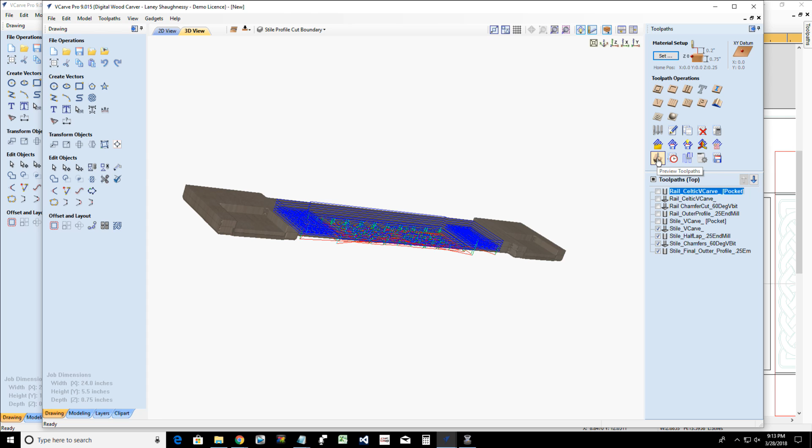And then on the back side, the style. Now we've got to make one quick adjustment. Let's go ahead and preview the stile. And then there's one vector, one very important vector that we got to create, and that's the rabbet around the entire back side for the frame, right, for the frame. So let's preview the rail, and then let's create it, and then we'll call it a day.

Now, we're going to pause before we create that final rabbet. Once again, we're at a pause point.

And there's our half lap. We're at a pause point, and we're going to answer some questions.

Correct, stiles on the top, rails on the side. Laney, could you just design one rail in one stile but cut two of each? Yeah, absolutely, because it doesn't matter which way it's flipped. You just flip it 180 degrees. Don't forget the back rabbet. Thank you, Jared Rippert.

William, the corners and rails seem to be the same height. Yes, it would be. When these two parts snap in together, everything is going to be flush across the top, so the corners are not going to be standing prouder than the top of the rails.

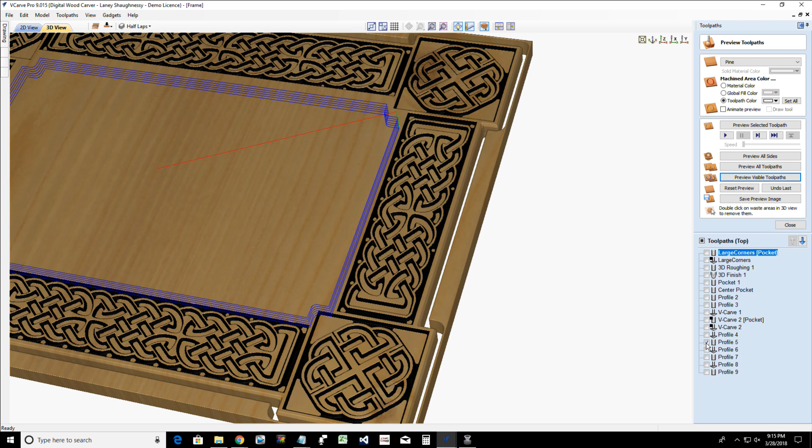Let me do my inside cut. That's my outside. Oh, profile 4 and 5. Let's preview those visible toolpaths.

So when everything is assembled together, the corner blocks and the stiles and the rails will be the same level all the way across the top. They're going to snap into one another. No, the corners aren't higher, they're flush. You could, if you wanted to pocket down the whole sides or something to make them a little thinner, you could have it to where they're standing proud. That would probably look good too, as well.

Could I explain tabs? Yes, and we've got to do our rabbet and our alignment pinholes. Let's go back to our two parts here. So tabs, ladies and gentlemen, when we are doing an outer profile cut, we've got clamps or double sided tape or hot glue holding this part, but when this part gets cut loose it can move around. So tabs, if we add tabs to the toolpath, they only really need to be about 1/4 inch wide, and in this case I'm going to go 1/8 inch tall.

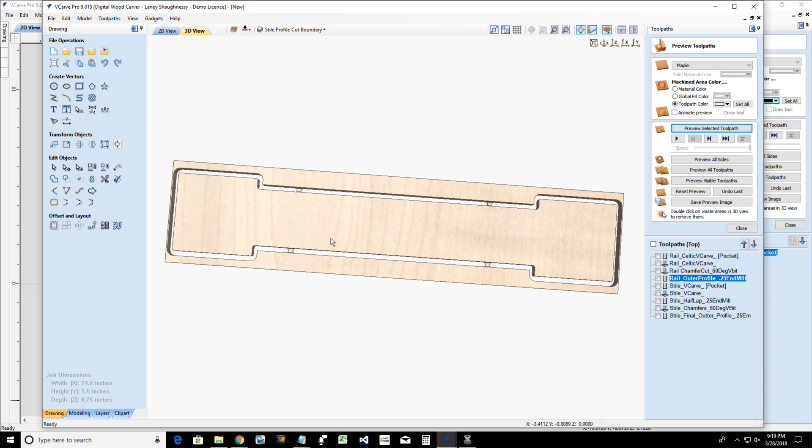So the tabs are small parts on the back side. It cuts all the way through, and it leaves these small little uncut areas, so that part is held in. And the reason why when I create the toolpaths without tabs, when I'm showing you guys, is because without tabs I can delete this waste material by double clicking on it, but with tabs I can't, it would delete the whole thing. So I just don't show it with tabs, but you want to have tabs.

So this would be the tabs for the bigger part. And if I were doing my profile cut for my stile, let's turn on the stile vectors, and I would come in and add tabs again, about 1/4 inch wide and 1/8 inch tall. Edit tabs, and somewhere - don't do it on your half laps, your joinery - somewhere on the side of your part.

And 4 tabs is sufficient. 3 would actually be sufficient as well, 2 also, but 4 is secure. And so we reset the preview, and if we were cutting that other part out, then of course we would have our tabs. And you just take a little razor knife or X-Acto knife and cut the tabs and sand it flush, and that's it.

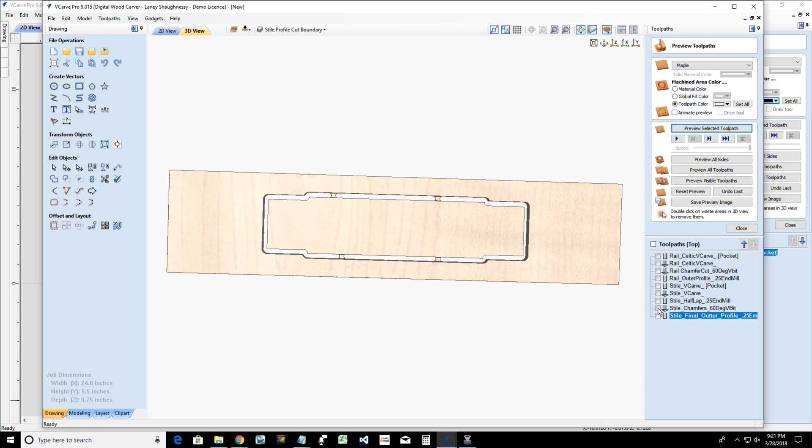Peter Hearn, just a suggestion: if you bevel the edges where it meets the corner blocks, it might hide any small gaps or height problems. Let's take a look, let's see here. Let's grab this, and this, and let's preview all of that.

Peter, are you referring to this inside cut, on the inside or outside, over the half laps where the two parts come together? Are you talking about beveling that? Because there's a bevel on the other part, and if I bevel this, my two pieces won't fit properly. Even now, because of the radius of the router bit, I have to chisel and clean these two corners to straighten them out. But those two parts have to fit square to one another. If I put a chamfer on there, I'll end up with a double chamfer on the part. Is this the area you're referring to about a small chamfer?

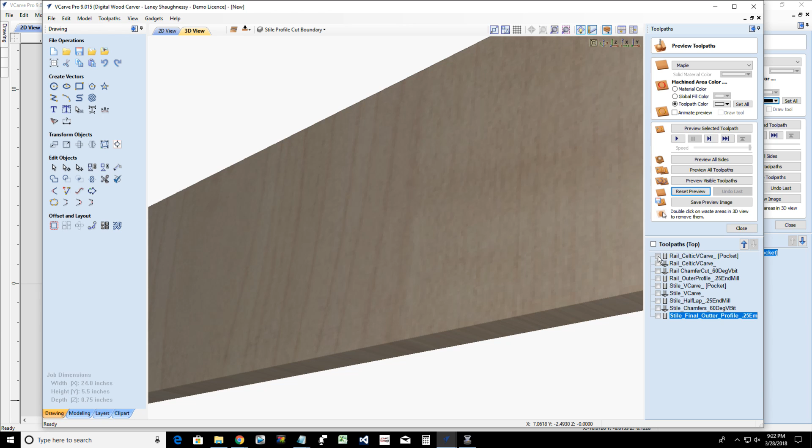This is a flat piece, and my mortises are a flat piece, and when they come together on the top part of the other part, you guys got a visual of this. Let's move here and get a visual. Now mind you, we've got corner cleanup to do right here, a little corner cleanup. But all right, so a flat part. Now let's reset this to a blank board and look at the rail part.

For this, I'm going to take the tabs off, guys, so I can delete the waste material for a minute. Rail outer profile cut. I'm going to take the tabs off for a second.

Okay, let me turn on the other side and get the half lap cut. Let me get this in position. Bear with me a second. I lost control there, let's flip that thing like this. Slide down.

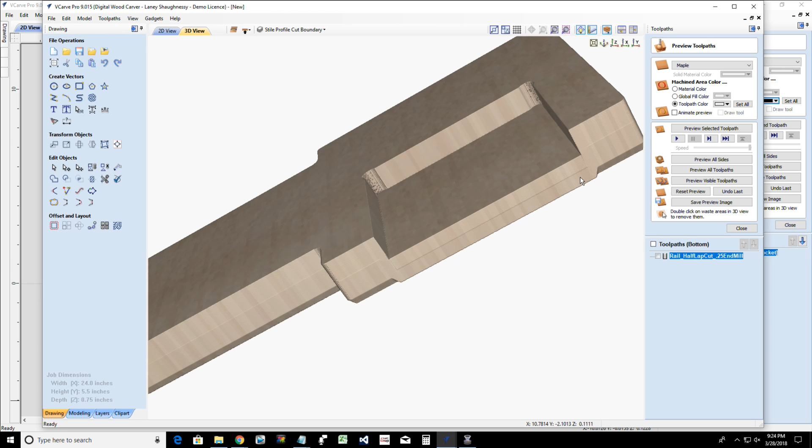Okay, so we have that flat area here. You can even see a witness line. I've got to change that, got to get rid of that witness line, so I need to offset a little bit more inward. But anyhow, we have that flat area where those two edges come together. And if we turn this over... oh shoot, hold on, I lost it.

On the other side of our cut, our chamfer is going to wrap right around into the chamfer on the stiles. And this piece here is going to have the chamfer on the other side of the cut. But those two edges would come straight together. I honestly do not know how it would look, Peter, if I did a chamfer on that end. I know there's a possibility it could hide some gappage, but it's going to create kind of a double chamfer look. Let me know your feedback on that, based on what I just showed you. It could possibly create a double chamfer look, and you'd have a V groove in the middle. But I'm not sure, I'd have to check it out.

Wayne, how do you get the solid color mode on 2D so you can see the color where the tool is cutting?

Great question. In Vectric 8 and 8.5, down underneath the toolpaths at the bottom, you have three options, and one of those check boxes is solid. You can check that and you'll get that cut look, that solid view. If solid is not checked, you get the wireframe view, with those arrows and lines. But with solid view checked, you get the solid view.

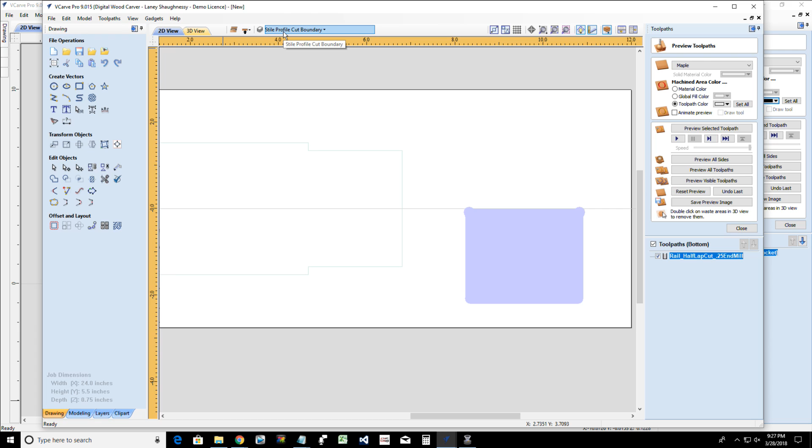In version 9, they moved that tool up to the top view bar. One option is toggling the 2D drawing visibility for the toolpath on and off, so I can turn that toolpath visibility on and off even though it's checked in the toolpath list. I can also toggle between wireframe or solid, showing where that router bit's going to cut. I like using the solid view because it lets me see where on my lines, how close I am to the boundary, if I'm offsetting past the boundary and things like that. So on this boundary here, this half lap, that would be the rail half lap. You can see the cut, showing the router going right up to the cut and things.

So I like the solid view, but also the one thing I like about it is it's showing you where that router bit is cutting. It shows us here that we get a radius cut versus a square cut, because that bit can't fit up in that corner. That's what I like about the solid view on the 2D view, where you can see where the bit's cutting. That's important, especially when you're doing something like inlays and things.

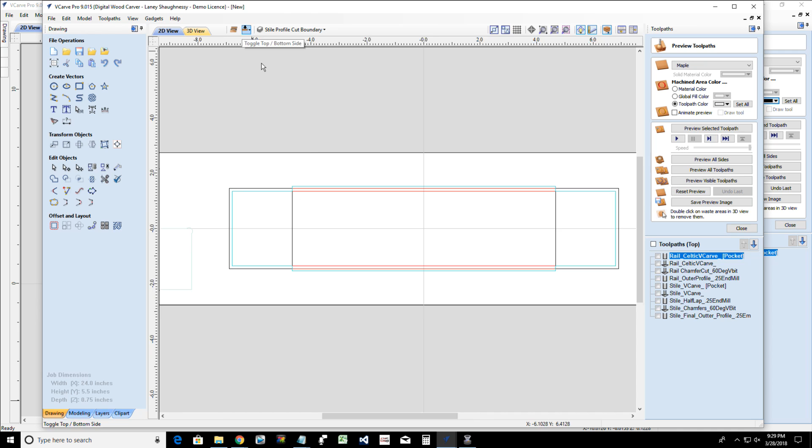On the top side here, let's turn the 3D on just so we can get the full effect here. All right, so we've got our parts here, there's one more part not turned on. Not that one - rail. Okay, that's good.

So for this, let's say if I were cutting it out of this board, I am flipping along the x-axis. I do want things to be centered. So what I'm going to do is draw 3 circles. I do use a 1/4 inch dowel pin.

Let's turn off - I got a rail turned on there. Let's turn off that. So pick a spot, any spot on this, and we're going to have a 1/4 inch diameter. I'm going to mirror that, making sure that it's absolute centered. Let's align it first, make sure it's absolute centered on the material, which it is.

Now I'm going to mirror that horizontally to the other side. And so I know there's only one way to flip this, I'm going to create a third. I'm just going to hold down my control key and drag a third, and snap it right about there, center. The third one is not 100% required or necessary, but it does help with keeping your orientation as to which way you flip this, so you don't flip it backwards or upside down.

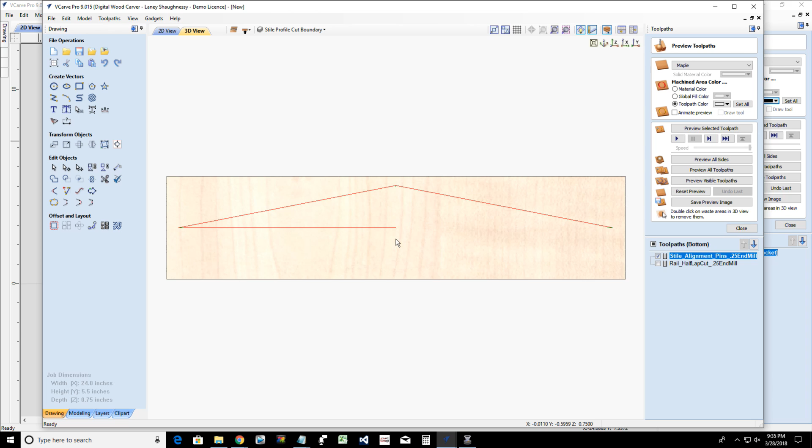And our 2 rails are going to get cut out of 2 different boards, and so we're using our alignment pins. Now, if you decide to use a shorter board because of the length of the stile, be sure to move your alignment pins in closer on the ends. If not, you need to use the board that you've got calculated.

So we've got that, but now while we're on the back side here, let's go ahead and create our rabbet - we've got to have our rabbet. So this is the fun part.

We've got to draw the vectors for the rabbet real quick. So what I'm going to do is cheat - I'm going to go back over to the front side and work off the front side.

And if I'm not mistaken, this was my chamfer line right here - it's my chamfer line right there, and it's also my profile cut line, and so on.

Okay, so I'm going to draw a rectangle. I want it to be a little past this vector, but for right now, I'm going to snap to it.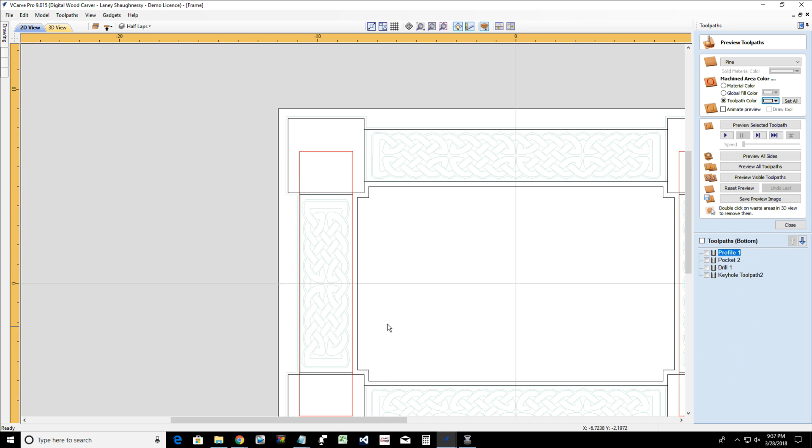Now my rabbet - if we look at the other design and go to the back side of that design, that rabbet cut - let me turn on the rabbet.

That's my keyhole - keyhole vector, center profile, rabbet boundary. Of course, it's the one named rabbet boundary, ladies and gentlemen.

All right, so if I look, my rail is here - okay, this is the vector for the rail. So that distance from here to here, if I take a measurement, and I'm going to do a vertical measurement...

Oh, that measurement is from here to the inside of my rabbet - a 1/2 inch.

It really doesn't need to be that wide, but okay. Knowing that, let's go ahead and go back over to our part here.

All right, so I'm going to draw a rectangle, and I'll go a 1/2 inch - I'm going to go a 1/2 inch.

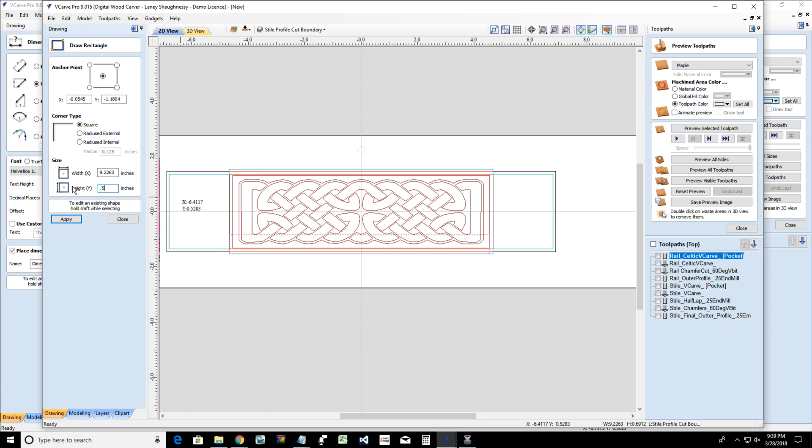And I need to stretch this out, get it all the way to where it belongs.

Now, when this part... I'm going to go a little bit past because I want a nice smooth area here. Now my part, when that corner comes in, when this other piece—let me draw a rectangle to represent the other part. Let's pretend that this is my corner block coming down, right?

When I cut that half inch rabbet in it, those two pieces—when I cut that rabbet in that part—those two pieces should come together and that rabbet should be nice and open.

Okay, so for the stiles, with this vector here, I'm going to move it to the other side, because remember we're cutting on the back. And it doesn't matter what side I'm going to be putting in. Remember, we're drawing one part for two pieces—we just rotated 180 degrees.

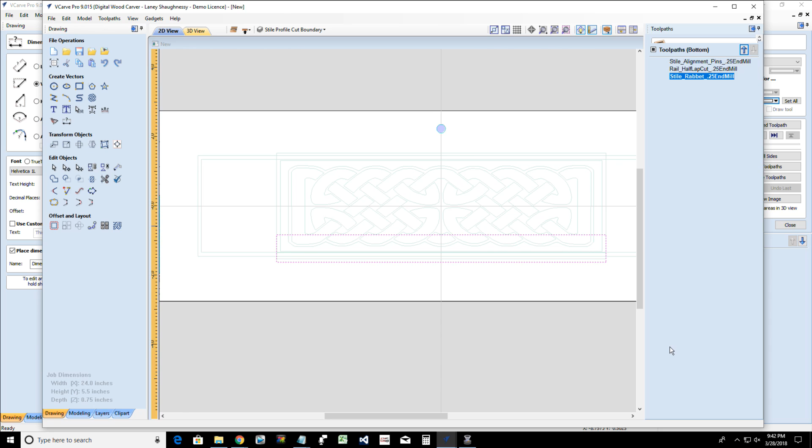Okay, so let's preview this cut, preview the visible toolpath. Okay, let's flip it over and preview the other stile parts so we can see it all in its whole glory.

All right, now the thing I've got to look at—you see here what happened here. My rabbet on the other side kind of took the material away where my tabs would be, so I most likely end up moving those two tabs on that side to the ends.

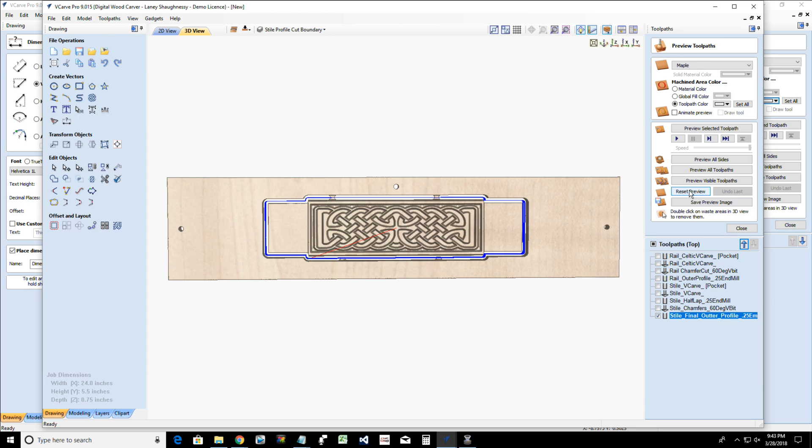Oops, I don't need one up there. And recalculate that toolpath, because that rabbet would have cut them away, and I don't want that.

Good question, Leanne, hold on. We'll take a look at that and see. I don't believe so, but we'll take a look at that and see about that question.

Let's see here, let's do that alignment pins in our rabbet. Got to think about this—that part is going to snap into the other part.

Yes, yes, Leanne is correct. I need to go out a half inch more. Ba-dum-bum-bum.

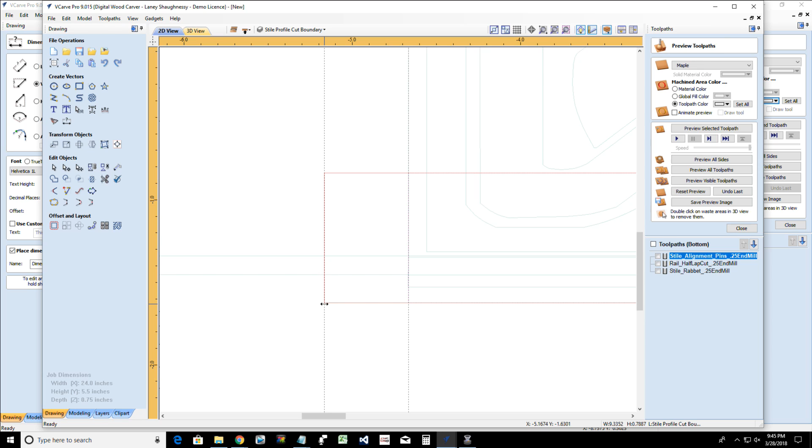Alright, if I hold down my shift key, I can pull that out and snap to that. Holding my shift key allowed it to pull both sides at the same time. So let's recalculate that toolpath.

Okay. Smart, good going, good going. Okay, so this is going to be my stile with its rabbet and everything for some kind of pocket or something to sit into.

The depth is going to be based upon you, but also you've got to remember on that half inch out, we've already milled down for the half lap three eighths of an inch. So there's not much meat left right here in these areas, not a lot of meat left there because of that half lap. So we've got to be mindful about that with that rabbet on the backside, the depth of that rabbet.

All right, so let's now reset the preview. Let's turn off all the stile toolpaths. Let's turn on all the rail toolpaths, or layers, should I say. Okay.

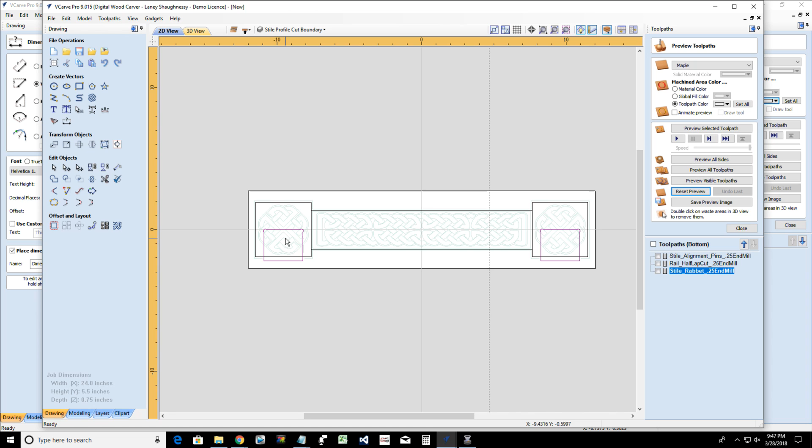Okie dokie, so on the back side here, our parts are coming in, snapping in, bam, bam. We're going to, on this piece here—this is my rail part.

Rectangle tool, rectangle tool, rectangle tool. Snap out of it, Laney. I'm gonna snap to this side. I got to think about this corner offset right here—this gets milled away too.

So on this—oops, let me change the size. It's got to be a half inch, not three quarters. Oh. Unlink the XY so I can change that.

All right, on this part here, I need to—my half lap's coming in. I really need to extend into that.

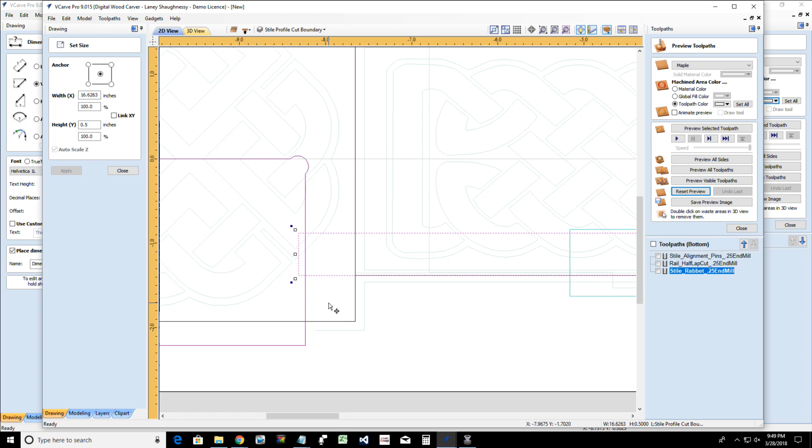Because on my rail, I need to extend just a little bit past that to get a nice clean cut so I don't get those round radiuses. But I've got this corner block right here, so my pocket needs to be out here. Make sure I'm passing that as well.

Now let's create that tool path. That's going to be on the back side. It's going to be a pocket cut, quarter of an inch end mill. We're going to call this rail rabbet. And calculate.

Alright, let's preview this. So we got our rail half lap and our rail rabbet. Let's preview the visible toolpath on the back side.

Alignment pins. Hold on a second, we gotta get alignment pins in here. Okay, stand by just one moment. We gotta get some alignment pins in here.

Now on this for the alignment pins, I will need a third alignment pin, and I would draw on this part here. It doesn't need to be out in the corner. I've got some waste area here, so I'm going to come in and mirror that. Doesn't matter really the placement where I put it, so I'm going to mirror that across the job center. So when I flip, I have that alignment pin. This one will be gone.

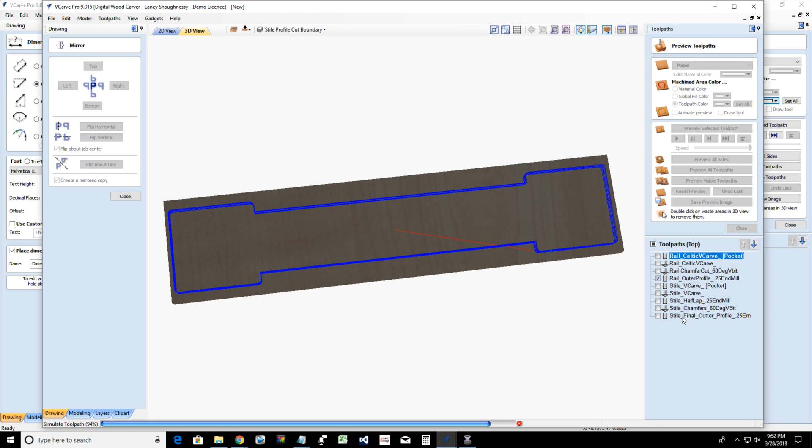All right, I'm still getting a flat mark right there. So my bit didn't travel that far past that corner. So let's change that vector. Let's recalculate that. Oops, wrong one.

Okay, let's take a look at what we got going on here. So we've got our rail, let's flip it over. We've got our rabbet, quarter-inch rabbet, nice clean cuts. And then when our stile comes in and snaps in, the big thing is we got to figure out on the stile, we got to make sure that when that stile pops in, we got to see what that distance is to that rabbet edge.

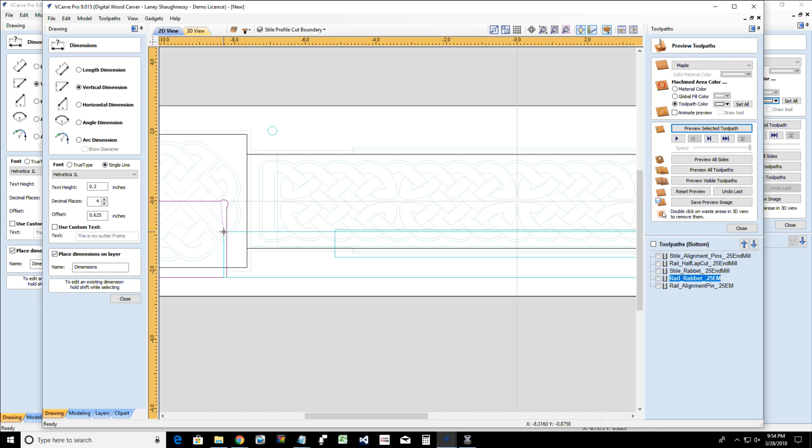It should be a half inch, but we've got to kind of measure. So let's take a quick measurement from this point to here, if I measure vertically from this point to my rabbet right there, 0.8758. Okay, 0.8758. Remember that number.

Alright, so let's go in here and let's turn off some rail stuff real quick. And let's turn on some stiles. Oops, had the wrong layer active. Let's move that. Rail rabbet. Vector.

Turn that visibility off. Alright, so when this part comes in, and it sits inside that rabbet, it's sitting right up tight. Remember, we just had a measurement of 0.8758. If I take a measurement from here to the end of my rabbet, I'm short. So my rabbet would be short. So I need to come in 0.8758.

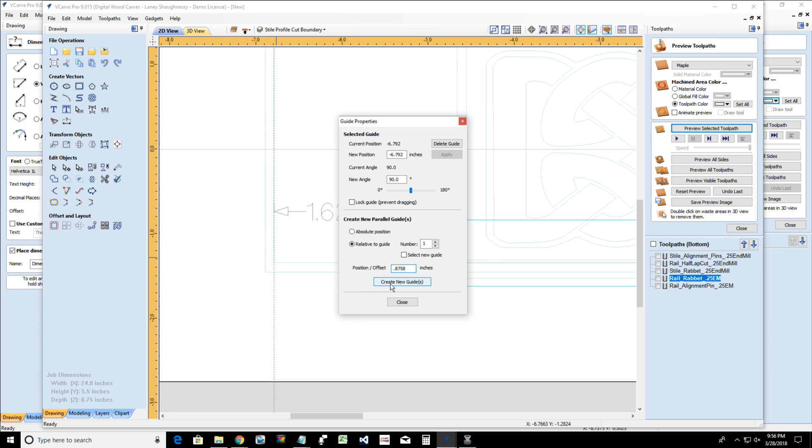So let me close this. Let me snap to here. And let me create a new line going positive 0.8758. Create a new guide. And that's what I need to pull my rabbet out to. Holding your shift key down so I can just pull it out and snap to there. And then recalculate that toolpath.

Do you understand why we did that? Because when that part fits in there, this rabbet's got to intersect with that 90-degree corner on the other part. Okay.

All right, so all in all, guys and girls, hopefully you got this. Let me take these guidelines out of the way, and let's turn on some front side vectors here and stuff. So we basically created two parts that we're going to cut twice in a sense. Each of them going to get cut twice to create all four frame pieces. We don't have to cut it out of a big panel.

So this is option number one when you're making your frames. Half lap joinery is going to be the best part of the joinery for this, because you don't have to worry about mitered corners, any of that stuff. The half lap joinery is going to be the best option in this case. If there's another option that you think would be better, let me know for sure in the Facebook comment sections of this video link, and we'll discuss it.

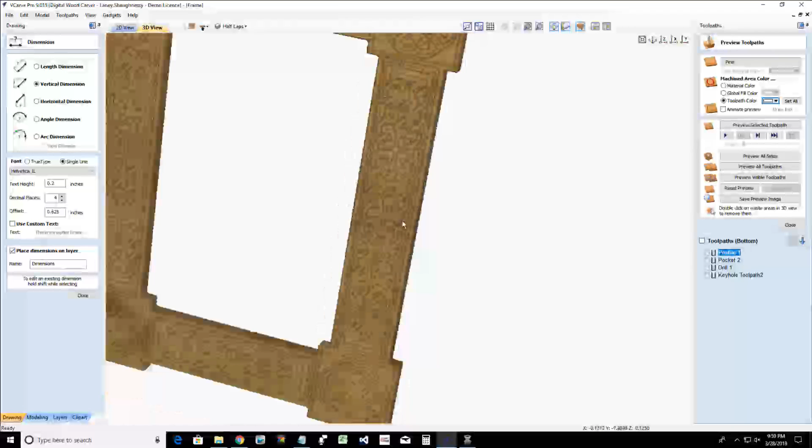So we got the two parts. Option number one, cutting the parts out individually, or option number two, cutting the entire frame out as a full-on whole panel being cut and milled out and things. Out of a solid panel, cutting it out. Now, out of the solid panel, that might be an ideal situation for like smaller frames and all. But if I wanted these to be bigger, you're just scaling the size, guys. However long you want your rails to be, however long you want your stiles, and let's turn this around properly. So we're calling it what it is.

However long you want your rails to be and how long you want your stiles, you would just scale that up accordingly. Right now, as a frame, in this case, it is falling just under 24 by 18.

The profile cut is cutting just under that 24, so it's about 23 and some change. The part is running around 23 and a quarter, a little over, by 17 and a quarter, for a panel.

I'm going to be sending you, let's turn off the small corner knots. There we go. I'm going to be sending you the... oops, I got a couple things on that shouldn't be on. Bear with me a second.

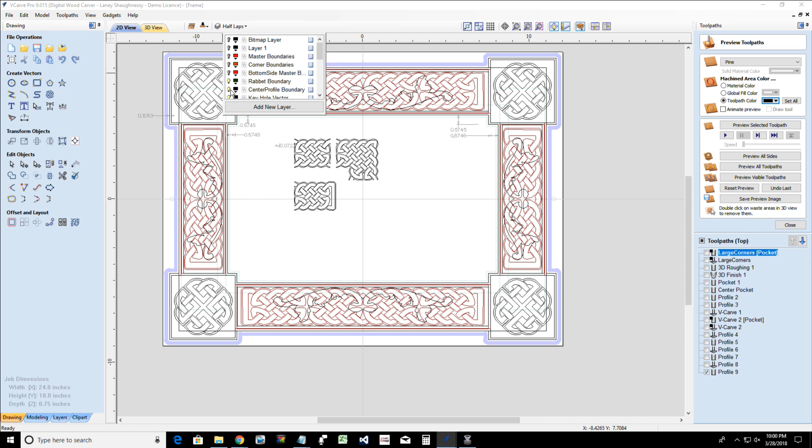Stand by. Original frame layout. Well, son of a gun, where's that sucker at? I got some extra vectors in there from the other models. But anyhow...

I will post both Vectric files, the full panel frame and the individual rails and stiles. I will have all of your layers nice and organized and renamed, all of your tool paths organized and renamed.

No matter if you're getting files from me or anyone else, do not ever take a tool path for granted. Be sure to open these programs up in your software and recalculate these tool paths based on your tool settings. You can feel confident with me that I'm running pretty much the defaults that I always recommend, but again, even though it's coming from me, don't ever take a tool path for granted. Always question, make sure you double check, recalculate if you must, and resave.